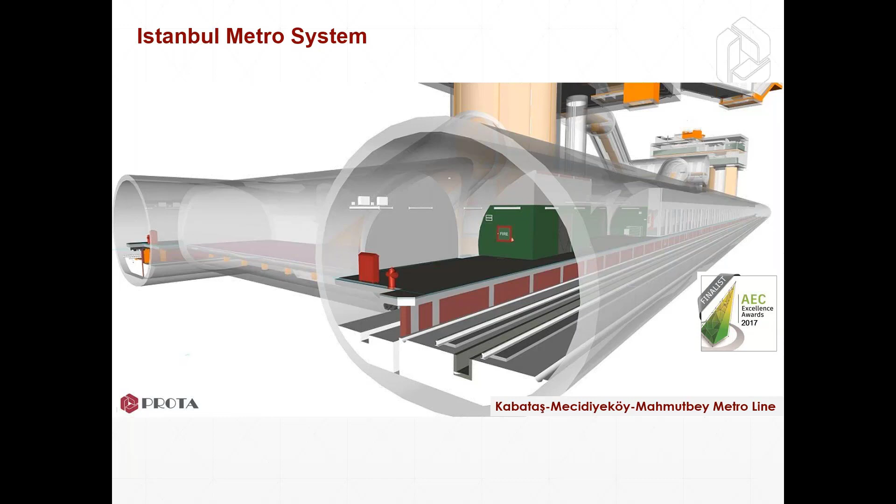So we've been involved with delivering some very large industrial, commercial, civil, infrastructural projects using our systems. We've been involved with delivering things like the Istanbul Metro. Last year we were involved with the largest terminal building in the world. We were involved with full design services for this.

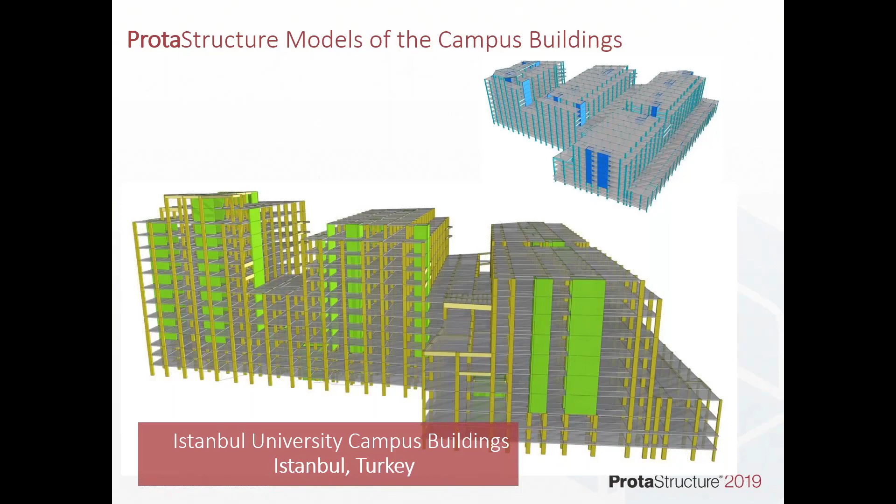We've also delivered other interesting projects, a number of airports around the world, Cairo Airport, St. Petersburg, Pristina. In fact, we've designed over 20 airports globally. We've also been involved with some very large, quite complex and challenging educational facilities and medical facilities. Recently, we were involved with the largest hospital in Istanbul, and we've also delivered on a range of other interesting projects.

An interesting one we've just been involved with recently was the new Turkcell building. This was for a data center for mobile communications, which houses very sensitive equipment. And part of the design process was looking at how we could ensure that the building was functional after an earthquake, and that sensitive equipment was protected.

So there's a lot of interesting parallels with what we're doing in practice as a consulting firm, and bringing that experience into shaping and delivering the software. Obviously, we also work very closely with our clients to ensure that the kind of development that we introduce is fit for purpose. So today I was going to talk about ProtaStructure 2019, and in particular Service Pack 7.

ProtaStructure is actually a collection of tools that forms one complete integrated system. Now, everything comes together, so it is one package. And the concept behind ProtaStructure is it's made up of a central modeling platform, which is ProtaStructure, and it has ProtaDetails and ProtaSteel for concrete and steel detailing. And being a physical modeling system, we can integrate this with other platforms, including Revit and the like.

So just a bit more detail on that. ProtaStructure is a structural BIM design solution for concrete and steel buildings. Now, what do we mean by that? Well, we are working with physical objects to develop models very quickly. And as we develop the model, we will automate a lot of the things that you would normally do conventionally. Things like loading is automated.

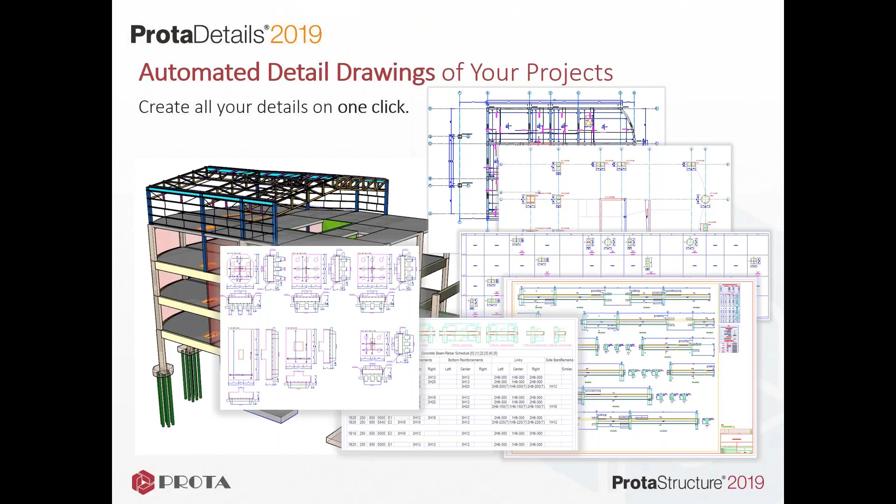It is a complete CAD system, so you can make changes in here, and you can just adapt things to suit the end product. Okay, it works natively in DWG, so it's very much a little bit like AutoCAD in the environment, and you can use it as your own preferred drafting platform if you wish, but we've got specific tools in here that help manage the delivery. And also we have ProtaSteel, and ProtaSteel allows you to automate all your connection design, and then from there you can produce all your detailed drawings right down to shop detailing.

Now BIM's becoming increasingly important with how our clients deliver projects and communicate with other project parties. And this is why we've spent significant time investing in integrating and having an open platform where we can share and communicate with other platforms which are commonly used in the engineering and architectural space. So we have bidirectional links with programs like Revit. We have links out to IFCs. We have direct links into other platforms like ArchiCAD and Tekla.

There's a range of tools here that just allow you to easily take information out and share and communicate with other people within your project team. Now, the links are intelligent. You can work in a bidirectional manner. You can make changes, say inside Revit, and those changes can be communicated back into ProtaStructure. So the whole idea is that working with a physical model, these processes become very easy and very seamless.

So enough of me talking and introducing us. Let me get into the software and show you how this works.

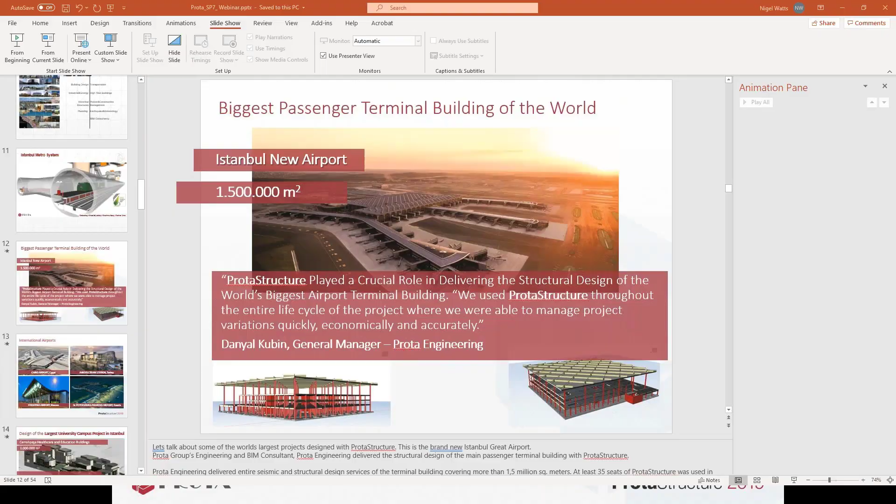So I'm just launching ProtaStructure, the 2019 version, and when we start the system, just give it a second, it's going to load, and you'll see it's just flashing up. I'm using SP7. We're about to release this into the market. It's a small update that fixes a number of known issues that we've had, but it also significantly enhances our OpenSees integration.

Okay. Now, if you're new to the platform, we have quick start guides. We've got online help systems, YouTube type videos that you can watch. We also regularly update the software, and they're all fully documented, so you can see what's new progressively as we've rolled out new service packs. And what we tend to do nowadays with new development is we're continually rolling out new features and functionality, as well as updates to the system, in between major releases.

Now I'm just going to come in and create a new project. You can give this project a name. Let's just call it Global Prota. And if you hit OK, you're then faced with a series of templates here. Now these templates will help drive your design and detailing. And you can choose any template you like in here, depending on your location.

Now we've studied different markets, and these templates have been set up to suit local practice in each of these markets. So if you're doing a project in the UK, you could load the Eurocode template there and follow local practice in the UK. Maybe you're doing a project in Singapore, or perhaps you've got a project in Ireland, or maybe even Hong Kong. So you can just choose these templates, and we've locally customized those to suit the way engineers would typically work within those countries.

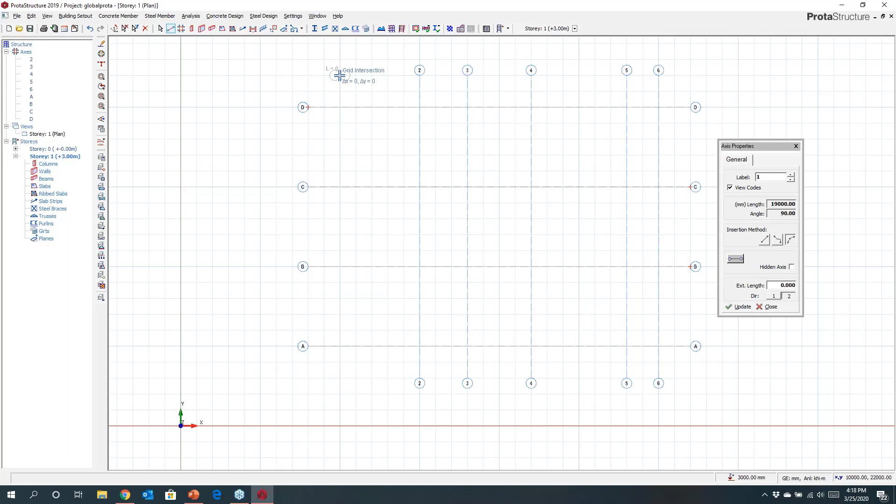So if I decided that I don't want this particular axis to be straight, maybe I'd like to define it as a curve. So in here, you can come in and set these up and create. Now you're not constrained, so if you have a very irregular geometry, maybe here I've got an axis which is not exactly straight, you can create these in here. So I can use this to help me create any unusual geometry, and you can see you can virtually create any type of grid line arrangement that you like.

Okay. Now we use the grid line arrangements to help us set out. Now at this point in time, I might want to come in and place some columns. Now you can see that the object that you're working with is previewed, and you can then click to create that in the model. Okay, and you'll see that as we're going, we're automatically creating numbering and labeling for the elements in here. To create multiple elements, you can box around.

If you wish to change the orientation of things, you can type in different parameters here. Okay, maybe I want to orientate the columns along the curvature of that grid. You can see that I've just automatically aligned those there as I've gone.

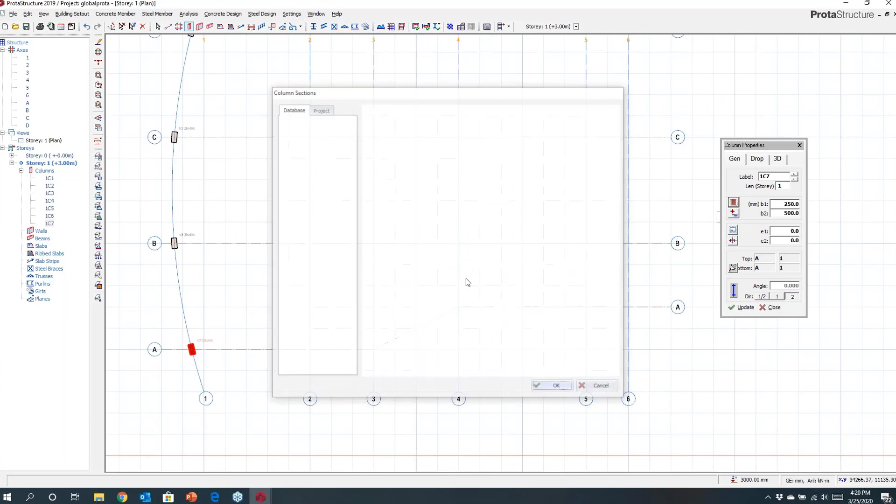Now in the library here, we've got different objects that you can work with. So I'm using maybe some concrete elements here, but I could very well be working with steel. Okay, and there's a range of different steel libraries that you can draw from. You can create your own sections, built up sections in here. There's also cold form and composite elements that you can work with here. So you can just draw from this library and choose the elements that you want to work with, and then go away and create those in the model.

So if I create a 500 diameter column here, we calculate the underlying engineering properties, and then you can go and grab that and use that in your model. So here I'm just placing some additional columns in my model. Okay. At the same time, I may also want to place my core wall. So again, I can just key the core wall properties in the dialog, and then I can go about modeling that.

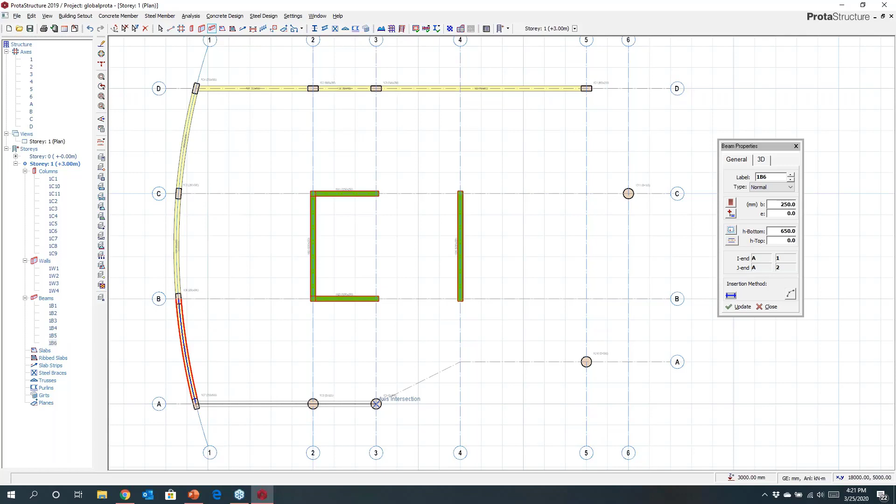Now I'm going to move to beams, and in here you can key in your beam properties. Okay, you can control things like fixities and alignments and so on here as well. But to create your beams, you can just box around to put them in. Okay, and you can see I've just quickly boxed around, or you can click between elements. Now, if you have unusual arrangements like here, I might have a beam that's cranking, it will just follow that grid line, or I can just snap to a column and then that is created automatically.

If I have a beam that's, say, curved, we can just instantly come and create that curve as we go. Now, if you have lots of members, you can just box around to put those in, okay? And the system will automatically create those members. It has split these beams. If maybe I want to place a beam through this wall, we understand that those beams and walls are already existing. You don't need to worry about overlapping. You can just draw them in, and we'll create those extra members either side of those existing elements.

Now I'm going to snap to some points here. I'm going to snap to, say, mid-span. You can see there's some handy snap points that we can use just to create those in. And you can come in and maybe you want to change the beam sizes and so on as you go. But if you've got a particular distance, and if you hit F2, you can just type that in, and you can just place. Whoops, sorry, let me do that again. Okay, so as I'm mousing over, maybe I want to place a beam at a different point. You can just select those points, and then you can place them in.

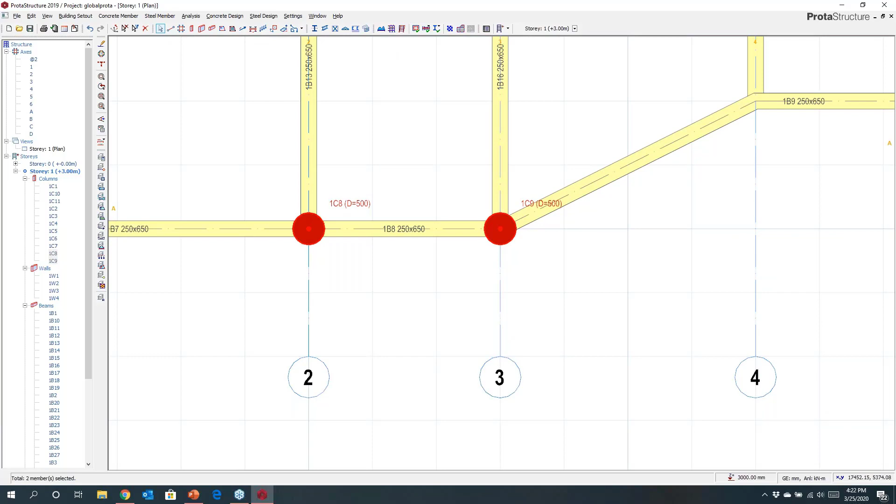Now in here, once you've got the geometry in, you can work with this. So you can see that I'm just using my cursor keys to move these around. If I hit Control, I can move them back and forward. So I can just reposition the geometry to suit the underlying architecture. And that could be for a beam, or it might be for some columns as well. So I can just move these into place and adjust them to suit the underlying architecture. So the idea here is you don't need to be perfect with your grid line set out. You can just adjust and tweak things to suit.

And what you might also see here is that this is starting to look a little bit like a key plan. Okay, now I'm going to come in and key in some dimensions here. I've got maybe a 200 thick slab. Okay, I can draw from a library of finishes, and you can build up finishes with things like screed and marble and so on to create finishes.

And you can also, if you're not sure about live loading, this will connect to the code, so you can just come and choose what might be appropriate for your building. So maybe I've got a bedroom and that's my finish, okay, and then I can just click and we can create those elements within the model, okay. I may want to type in my own values. You're free to do this, okay.

Maybe I've got a toilet area where the live loading is a little bit higher. Again, I can just come and define this in the model here, okay. If I want to just key in my own values, any of these can be just adapted to suit, okay. So you can just happily go around creating these within the model, okay. Let's just do a couple more, and maybe I'll make that, I don't know, maybe it's 0.7, okay.

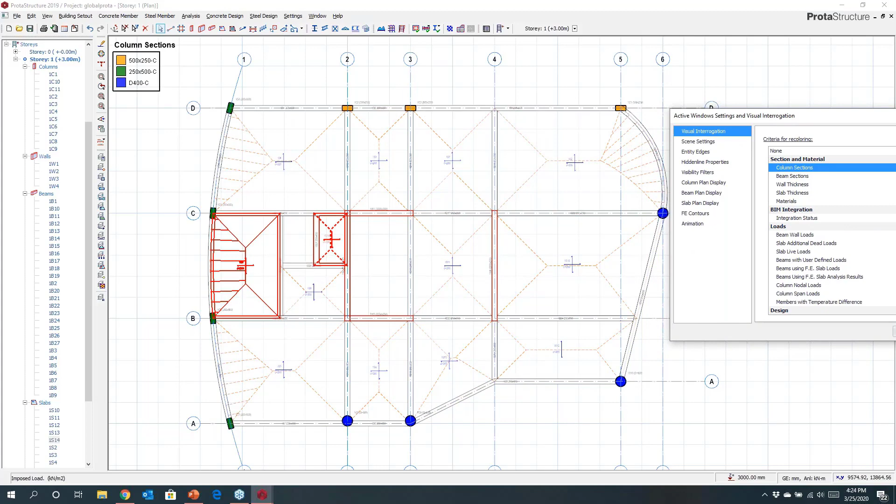Now, at this point, before you get too far, you may want to come in and review what you've done before you actually develop the model upwards. So in here we have tools for just interrogating the model, making sure that we are happy with what we've created. So here you can see the different column sections that have been used, or maybe different beam sizes that we've employed within the modeling.

I may also want to be looking at what kind of superimposed dead loads I've placed on the model, or maybe what live loads. So all of this is interactive, and you can see and check the model before you get too far. So that's a great tool just for being able to check before you start to develop things upwards.

Now, there's other things you can do in here. We have things like adaptive sketch lines. So if you've got unusual geometry, maybe over here I've got a slab which is a bit different. You can come in and use these sketch lines to create maybe the geometry of a slab, and then I can come in and place that within the model. So it could be a 150 slab. I can choose the type of slab it might be here, okay, and then maybe I want to drop it 100, for example, and then we can use it as a boundary to help us create that element within the model.

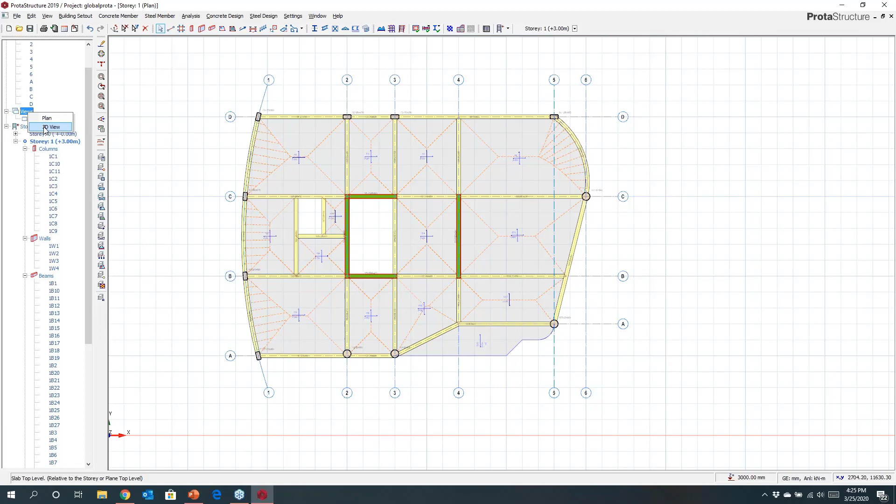Now, I've been working in a plan view, and you can see that this is starting to look like a key plan. Now, even at this point, I could actually extract that drawing out. I could also get the volumes for that floor if I want to. But what we're actually doing underneath this is that we are actually creating a 3D model. Okay, so you can see here that I've been working in 2D, but this has helped generate a 3D model.

Okay, and in here I can come and look at things both in 3D as well as in plan. So simultaneously you can work in plan and 3D. If you've got other screens, you can pull views off. Okay, so if you're working with a couple of screens just to make things easy, you can take advantage of that as well.

I'm now going to start to put in things like my brickwork loading. In here I can come and edit, say, beam wall loads. You can come and choose from libraries here of standard brickwork finishes, okay, or you can build them up yourself. And then you can just type in properties, and then I've just then come and quickly created loading on that beam.

Now, things like beam loads can be copied easily. Okay, we can just come and select elements around the periphery here. Okay, so you can see I'm just working my way around the edge of the building, and we can copy and paste those. So you can see that loading has just been automatically assigned to the perimeter of the building.

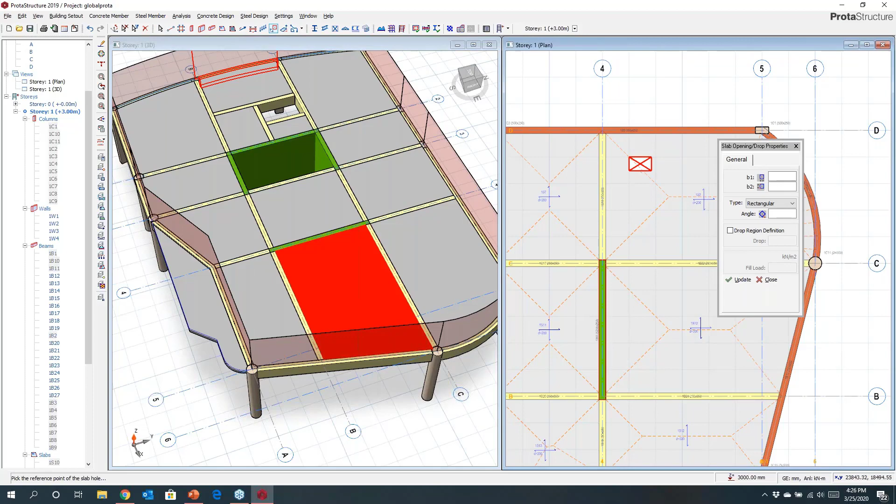Okay, now remember that we are working with a physical model. So if you want to come and place other things within the model, maybe you have some openings for things like services that you want to place, you can just come and easily create those. Now these are objects, so I can pick them up and move them around. So if I made a mistake with the positioning, I can just reposition these, and that's instantly updated.

Okay, if you have other things going on in the building, perhaps I want to introduce drops and the like, these can be easily defined in here. So maybe I've got a bathroom, and maybe I've got a set down to the slab that I want to look at. We can just create that drop, and you can see that part of the slab has now dropped.

You may have other things happening in the model. Perhaps you've got some additional loads that you want to define. It could be a brick wall load, for example. Maybe you want it to sit directly on top of a slab. Maybe it's a partition or something. You can just come and create that. And again, anything that you create in here, whether it's line loads, point loads, patch loads, all this will be visualized. You'll be able to see exactly what's going on within the model.

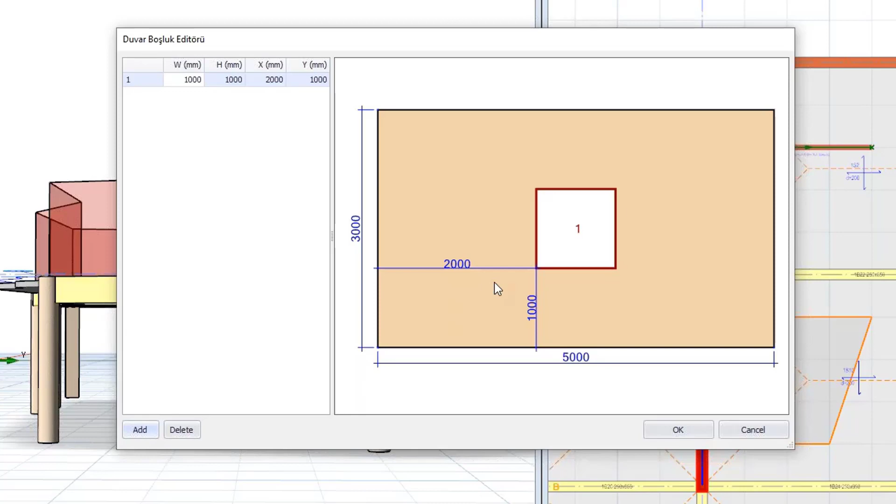I might also, at this point, just take the opportunity to introduce some openings into the wall. Maybe in my shear wall there, I've got an opening for a window, or it could be a door. You could have multiple openings. You can just come in easily in here and create that within the model. Now that just gives you an idea about how you might go about creating a key plan.

Okay, now there are some other smart things that we can do with this. So if you have other types of geometry, other types of elements within the model that you're wanting to consider, and what I'm talking about here is irregular elements, then these can also be worked within the model. So an example here might be that I've got an irregular column. It could be, say, a polyline column where I'm wanting to create unusual geometry. So in here, we also have tools to allow you to work with this. So if I have a column shape that's a little bit different, I can come in and create this element and use that back in the model.

Now what we can also do is use this to help us drive our detailing and set out. So we will pick up regular shapes automatically and we will provide detailing for those, but we also have the ability to create detailing for any type of geometry that you might have. Now I'm just going to ask it to try and automatically contain this, and you see it's found the perimeter there and it's placed some bars and links.

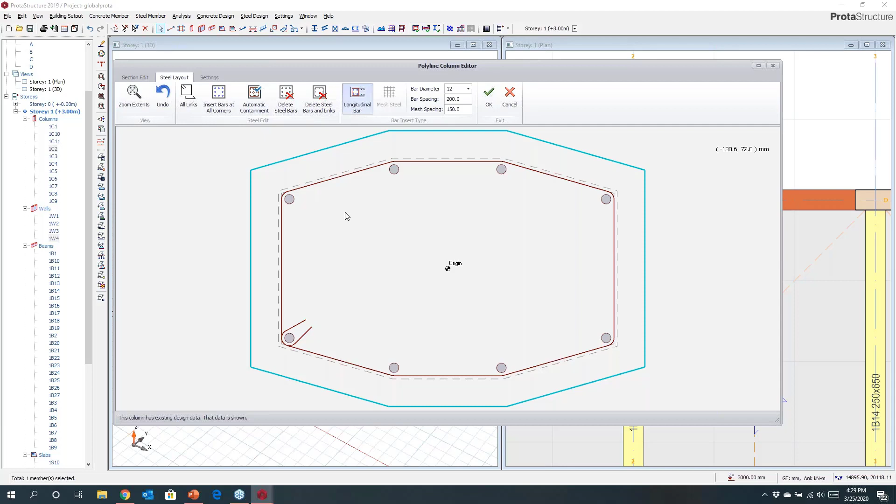I can also work with this. So if I want to add extra bars in here, maybe I want to add an extra couple of links to tie things together, or maybe I want to create some links around the edge there as well, I can. If I wanted to add extra bars in here, we can also work with this to create this as what we would call a template to then be used for the design and detailing.

So I'm going to put some extra side bars in there, maybe my spacing needs to satisfy the code, and I can create whatever type of rebar arrangement I like there. Okay, so you can use this tool to create virtually any type of shape, any type of column geometry that you like. And once you're happy with that, you can just hit OK, and that's then returned to the model.

Now, similarly, we can do similar things with the core wall here. So I'm just going to grab the core wall, and I'm going to get the software to merge this. So this is now merged, and if I go back to our polyline column editor, the merged wall is now available here. Now in here, there are tools that allow you to create any type of configuration you like. You can introduce end zones. You can work with the bar arrangements to provide exactly the type of detailing you want.

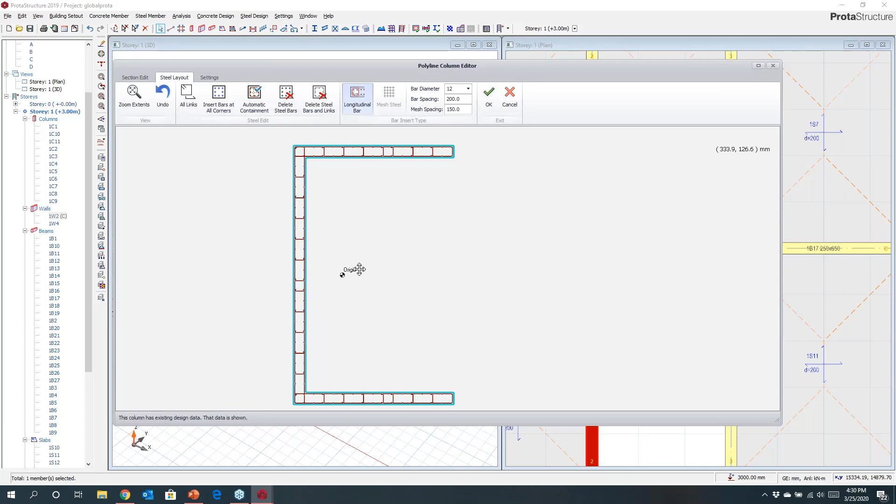I'm just going to ask it to automatically contain this, and if I just hit OK, you can see it's come up with a detailing arrangement. So this allows us to detail around things like corners. It also allows us to design this wall system as a single panel. We can then design and detail that as one object, and it's treated as one object within the design of the software. So maybe I'm happy with that. Then at this point in time, I may want to start to look at elevating this model.

So let's just come in and insert a few stories. Let's make this 5 stories high, and hit OK. And then you can see that that's put in placeholders for those 5 stories. Now I'm going to start to generate information up. So I can choose the first story, and I can copy this up.

Now you can choose what you want to replicate up the building. You can choose anything. So it could just be the columns that you want to repeat up. Maybe it's just part of the building. You can just select that and generate that up multiple floors. Maybe have different arrangements in different parts of the structure that can be created here. So if I hit OK, you can see that that's just generated up that part of the floor.

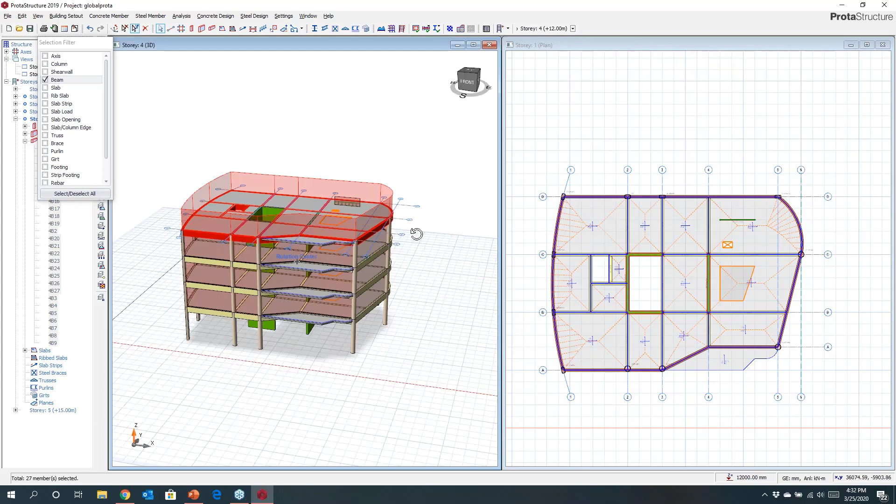Okay, and you can see there that we've come in and started to define what might be a complete building. Now you can work with this. You can make changes as you go. So if I want to remove things out, I can. If I'd like to come in here and maybe filter things out, I could also do that as well. So perhaps I'd just like to filter a few beams. And maybe I just want to grab all the members in the roof here. Now I'm going to remove those, and instantly I'm then left with, say, a flat slab system.

Okay, now you can make changes in here as well. I might decide that instead of having my wall there, I'm going to remove that, and maybe I'd like to come in and change this, and let's put in a column. Now, as it's a flat slab, I might want to introduce a drop head panel. Let's put in a panel for the slab here. Let's make it 1500 square, and I can make a thickening just locally for the column to provide that.

So I can then come in and place these columns within the model, and you can see that I've now updated our building so that I've got my flat slab together with my drop head panels for the roof, but the rest of the structure may be a conventional building. So you can mix and match different structural systems in here. You can just adapt the model to suit what it is that you're wanting to achieve.

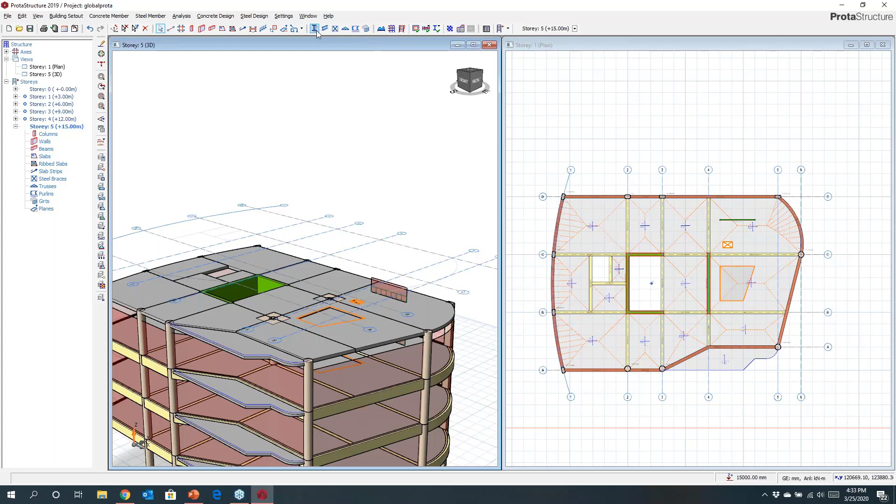Now I'm going to move to the roof, and at this point I'm going to come in and create some steelwork. You can see just to the center of the screen there, I've got different steel icons that I can work with. Let's just grab a column. I'm going to choose maybe a UC section. You've got different libraries here from around the world. I think everything that's readily available across the world is in the library. You can create your own custom sections as well to feed this.

I'm going to use a British section, for example. Maybe we choose a certain column, and then I can work with that in the model. So you can see here that I'm just creating these elements in 3D, and I've just placed some columns there within my model. I wish to create some trusses, so to do that you don't need to key the coordinates in, you can just come and select between elements here, and it will move you into the truss generator.

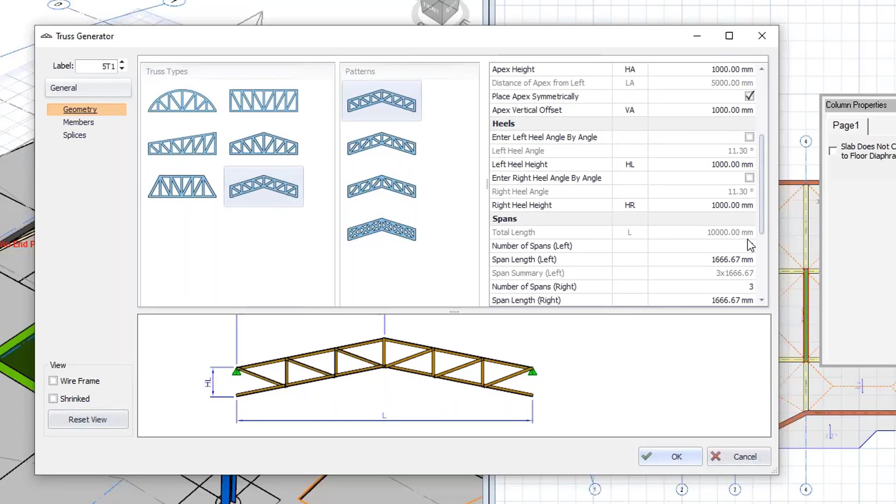Now this is very flexible. You can have different types of trusses. In fact, it's really flexible. There's a wide range of different truss systems that we support now. And you can choose the way that you might like a truss to be created. Now you can play with this. Maybe I want to have 4 bays or spans instead of 3. You can just adapt this to suit.

Member geometries are set up here, and you can come and play with these. So maybe for your internals you want to have an angle, or maybe you want a tubular section, or maybe you'd like to use a channel. It's up to you. You can just come and manipulate this. You can play and reorientate things to suit. And then you can just adapt this to suit. So here I can just come in and make these changes to the model. Okay, and then they're done.

Now you can position things like splices if you then want to move into ProtaSteel later and design these. So if I just say okay, that's created. The truss then becomes available to use elsewhere. So we've got smart copying features where I can just grab that and place this across the top of the building there.

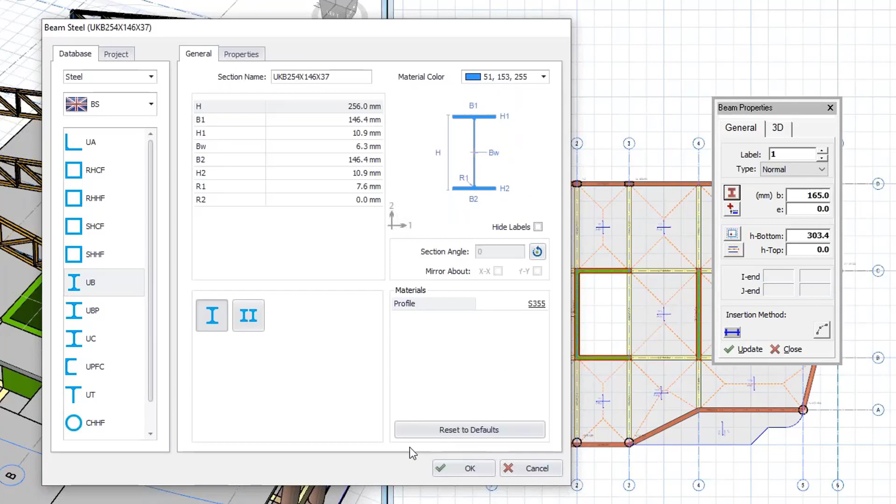Okay. Now, I may at this point also want to work with some steel beams. Let's just come in and create some steel members. I'm just going to choose a section. I can control fixities here. So if I want to pin both ends of the member, or maybe pin one end or pin the other end, you can see in the properties dialog you can control this, and then you can just come and place it. Now it understands that the columns exist, so those beams will be automatically split.

I'm just running across the top here, and you can see I'm just placing those members as I like. Now if I come to the roof, then I can just come and place members in the roof. You can see I'm just quickly doing that. There's intelligent snap points, so if you have unusual geometries, you can just snap to appropriate points within the model to make those connections.

The final couple of things I'm going to do in this model: I know that working with purlins can also be a bit tedious, so in here you can also drive the arrangement of purlins. So there's purlin generators here. We've used the truss nodal points as a set out. You can change these, so you can key in your own arrangements here. I'm going to come in and maybe choose a slightly bigger channel to start with. Okay, that can be set.

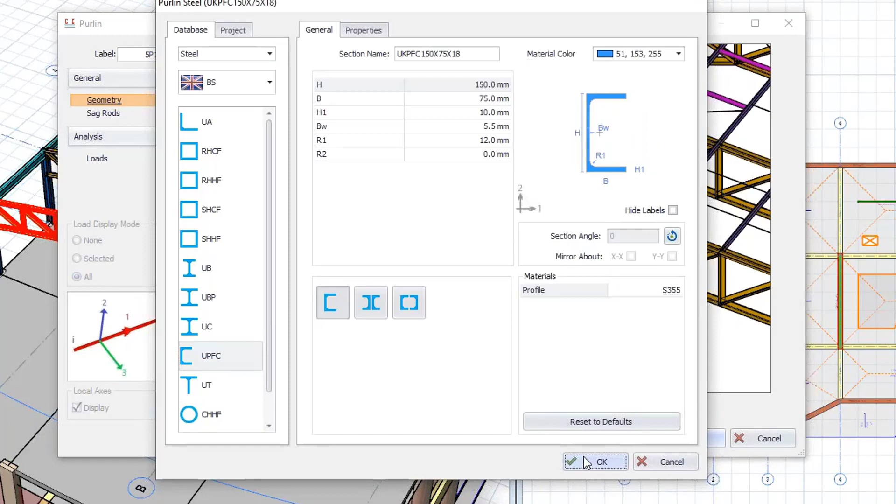You'll also maybe notice that we've also provided you with the sag rods here. So this is an update that we've introduced in the software recently. If you consider sag rods, this will help with the economy of the purlin design. But if you don't want to have them in there, you can also remove these.

Now the purlins can also be used to restrain the truss, and this will help with the effective length calculations for the truss, and buckling length considerations. You can also take advantage of that if you wish. Now you can also apply additional loading here to the purlins to set this up. But if you're just happy with that, you can hit OK, and then those purlins get created.

Now let's brace the building, because obviously I don't want this to fall over. So we can just choose a couple of elements. I've chosen those 2 columns, and then the software will propose to me a bracing arrangement. Now you can have different types of braces, V braces, K braces. Maybe you've just got a typical diagonal. It's entirely up to you. You can come and choose different sections in here. Maybe you want to use a tubular section, for example. You could choose something appropriate, and then this will adapt.

Now you can see here that those are crossing each other at the moment. I may want to just join them. It's entirely up to you. You can play with the orientation of everything in here. So if I wanted to move a brace by say 500, you can see that I've moved that. Now the analytical wire has stayed where it is at present, but if I want to realign that, I can. So it's up to you.

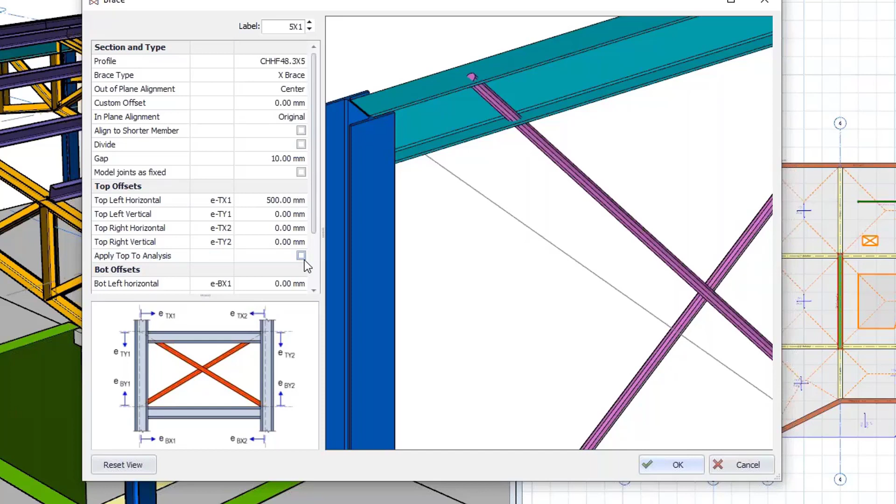You can adapt things. We're not necessarily changing the underlying analysis considerations. It's entirely up to you, but you can just work with this to achieve what you want. And you can preview what you're going to create before you create it. So let's hit OK. That gets done. Let's come across the top of the building here. I'm going to just create a bracing in that plane as well. Let's hit OK, and we can just work our way across to create the bracing of that particular part of the building.

Final thing I'm going to work with here is, let's just put in some girts. Now I'm just going to choose the peripheral columns there. You can play with the spacing, so let's just say it's 650. Again, I've got my sag rods in there. I might just take those out just for efficiency. And if I hit OK, then they get created also.

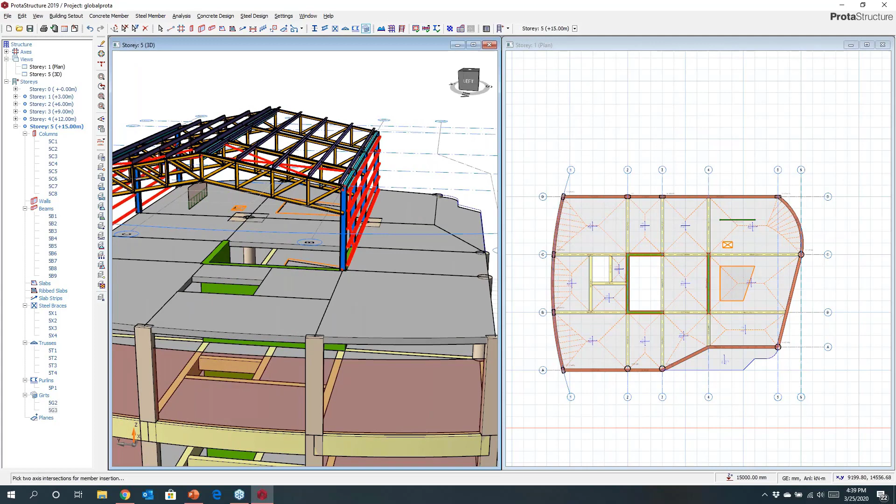Let's just work with this again, one more. Okay. So very quickly there, I've just come and set up a simple frame. I could put the girts across the front if I want. I could introduce wind posts. It's entirely up to me what I want to create here, but I'm just trying to give you an idea.

Now, the important thing with what we're creating here is that this is a physical model. So we're setting out everything physically. And this is very important because it then allows us to drive both the design and the detailing. Okay, so what we're creating here is what you would get on site.

So you can see that the purlins there are sitting on top of the truss. The girts are on the face of the column. The bracing's in the plane of the column. Okay, the concrete structure is set out exactly how you might see it constructed at the end of the day.

So this is how we work with physical objects. It's a structural BIM design model. So we're actually creating real intelligent physical objects that we then can drive through the analysis and design process. So we've completed a basic model. I now want to move in to look at the analysis and design processes. So I'm going to come in and just show you how this works.

When you come into the system, you can come and choose your preferred codes of practice. Okay, so within the software, if you're wanting to use American codes, British standards, Hong Kong standards, Eurocodes, we also have Turkish standards, being headquartered in Turkey. And there are other international codes that we're progressively introducing in here.

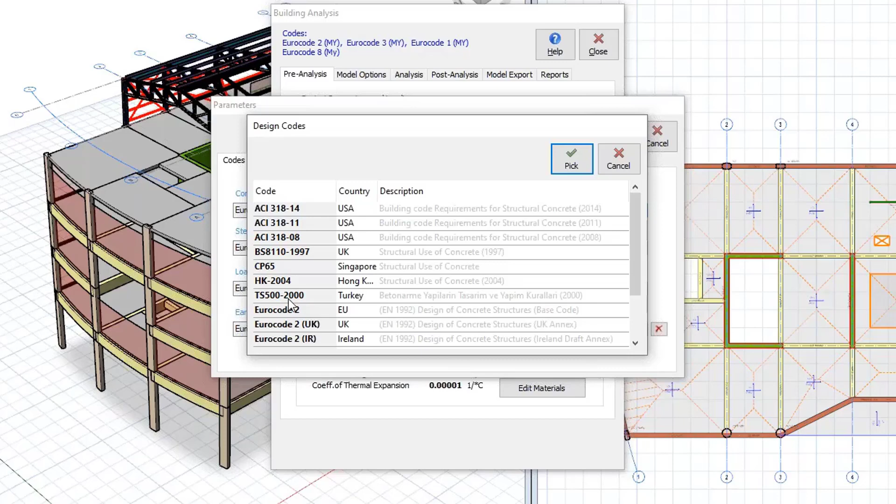If you are working locally, there's also variations for local standards. So if you are tuning in from, say, Indonesia or the Philippines, there'll be localized codes there for seismic, as well as standard IBC, UBC, and Eurocode standards are available. Okay? But as I mentioned, we are continually adding new standards, and we've got some new standards on the way that are coming in very shortly that we will announce with the next release of the software.

So in here, I'm using the Eurocode. I'm using it to the Malaysian National Annex. And if I just close that down, we then will cover parameters to that local National Annex. So here in Malaysia, you can come and choose your preferred city. If you're working with the generic Eurocode, then you'd have the generic options here. But for each country, we've come in and localized this to suit their local requirements.

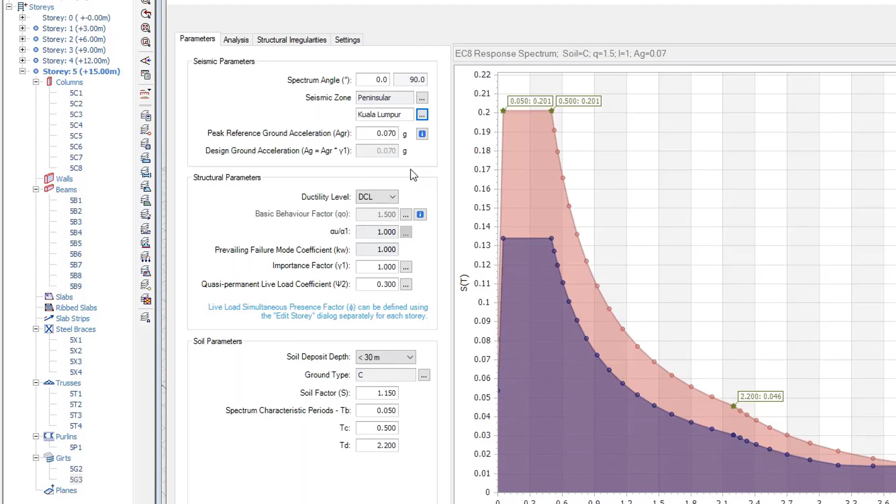So in Malaysia, for example, there's various seismic maps that you can choose data from. But if you don't have these maps available, or you're in different countries and you want to use Eurocode, then you can choose the generic EC8 option, and then you'll have full access to the EC8 code, and then you can just key the local parameters in accordingly. So we will then adapt this to suit.

You can choose from different ductility levels. The software is very capable and very powerful in performing seismic design. So if you are in a highly seismic region, we have significant capabilities in this area to really help you deliver design and detailing to suit what can be quite tedious and very time-consuming design requirements. So you can work with high ductility or medium ductility frames, or in this case, I might just work with a low ductile structure.

Okay, things like importance factors and so on can be prescribed depending on the type of structure it is. We will work with ground conditions, and you see that if I change the ground conditions here, the spectral curve will adapt to suit the code-based requirements. Now, if you do have a spectral curve of your own, you can import this. You can bring it in from Excel and load that in here. So this can be fully customized to suit where you may be in the world.

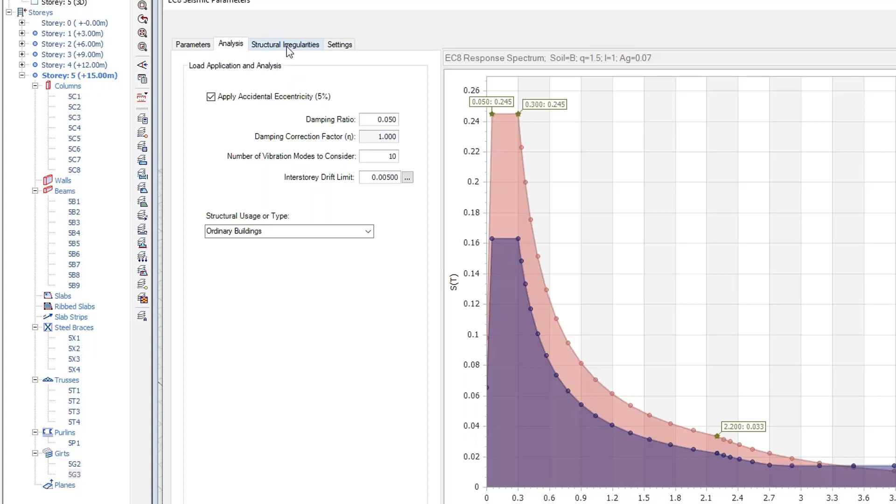Seismic loading is applied eccentrically. Okay, you can choose a number of modes that you wish to consider in the analysis. If you're running a response spectrum analysis, damping and so on can be adjusted to suit. We have some quite sophisticated checks that we can perform for irregularities. These are very onerous and are a requirement if you are in a high seismic zone. So if you're designing a building in the Philippines or Indonesia or maybe Turkey, these would be key requirements that you need to meet.

So these are automated within the software, and we will check things and we will apply penalties accordingly if they are required. So things like torsional regularity checks, mass and stiffness checks in plan, all these types of requirements will be looked at as part of that process.

There are also some quite advanced design capabilities. So for seismic, we also check for joint shear, strong column weak beam action, and there are a number of other key things that we do to make your life easy. So we will automatically scale the RSA results against the base shear to give you correct values, things like this that maybe normally you'd have to do manually.

So OK, that's set up. I'm now going to come in and create my loading. Now you can come and define your load combinations here, basic dead load, pattern load. Stage construction cases can be set here, and lateral cases can be set up here as well. So seismic cases, notional loading, or wind loading cases, all these can be defined here, and you can just set these up to suit.

So if I did choose wind loading and notional horizontal loads, then it will develop all the load combinations here for me automatically. So these are all set up in accordance with the code. They are adaptable, so you can just come back and make changes if you decided that you didn't want to consider certain things in here. Then you can just adapt these to suit. It's entirely up to you.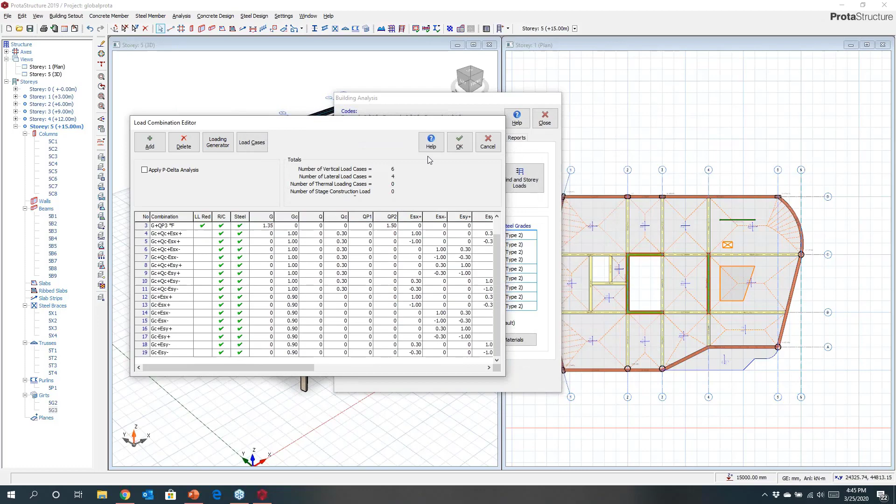So now I can come and adapt the parameters to suit the way I'm doing my design. So if I have certain bar sizes that I wish to omit and not consider in the design and detailing, I can do that here. Or if I have different grades of steel and concrete that I want to use, all these can be specified at this point. So they can easily be set up.

Now I'm going to run the model. We can have different cracked section properties for lateral cases. So if you are following the American code, there will be certain stiffness adjustments. You can make these adjustments to the Eurocode as well if you wish, but sometimes for lateral cases, particularly for seismic, you may be considering cracked cases, but then you don't want to use cracked cases for gravity cases, to say the Eurocode.

You can look at both of these concurrently. So I can set up two different stiffness matrices. One is cracked section properties for lateral cases, perhaps, and another one is uncracked for gravity cases. And we will run these concurrently, and we can envelope these for design.

I'm going to use rigid zones, and the reason why I want to employ rigid zones is I want to maybe drive a little bit of economy. So instead of taking moments at center line, we build rigid arms out to properly represent the size of the beam column joints, and then we can use those for more efficient design. If you had your foundations in the model, after the first run, I could produce a preliminary design. We can merge those back into the model, and we can look at soil structure interaction here.

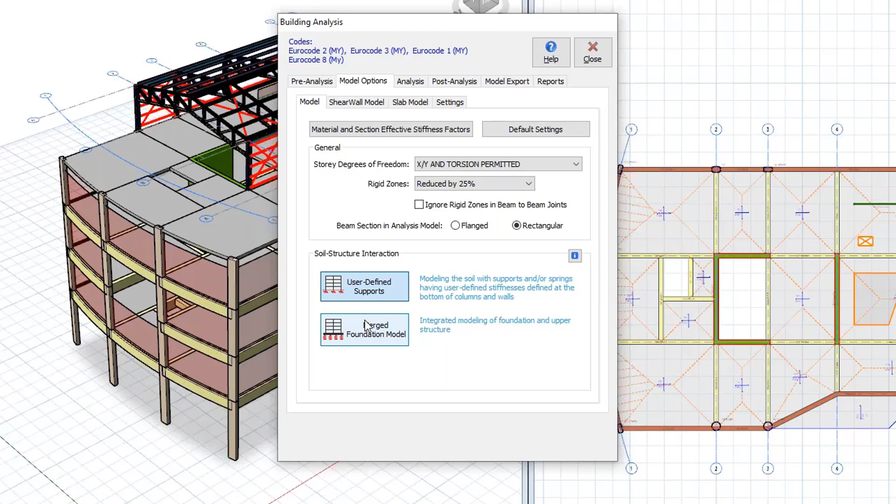Now I'm going to mesh my walls, and you can play with the meshing parameters here. I'm also going to come in and mesh a slab. So I set up at the fourth floor there, I have a meshed slab. So I'm going to define that as being meshed. And I can play with the meshing parameters here, as well as in-plane stiffnesses. So these can be set according to your preferences.

Now the analysis is a button, and once we've got this in place, we can then just come in and run the analysis and design. And you may see pre-analysis that there are building model checks here that you can perform. These will just interrogate the model and make sure that you haven't made any silly mistakes with the way that you've gone about creating the model.

If you're an existing user, I would really encourage you to do this. It will highlight to you if maybe you've made some errors with connectivity, that type of thing. They'll be picked up as part of that process. So that's a great tool just to use to make sure that you haven't made any silly errors before you get into running the analysis.

Now with this Service Pack 7 and with Service Pack 6, we've introduced a new 64-bit solver. We've enhanced the speed significantly over previous solvers, and this has allowed us to cater for significantly larger projects and models. We see some very, very large buildings, 40, 50 story high buildings coming all the time, and we've enhanced the system to be able to cater for those types of projects.

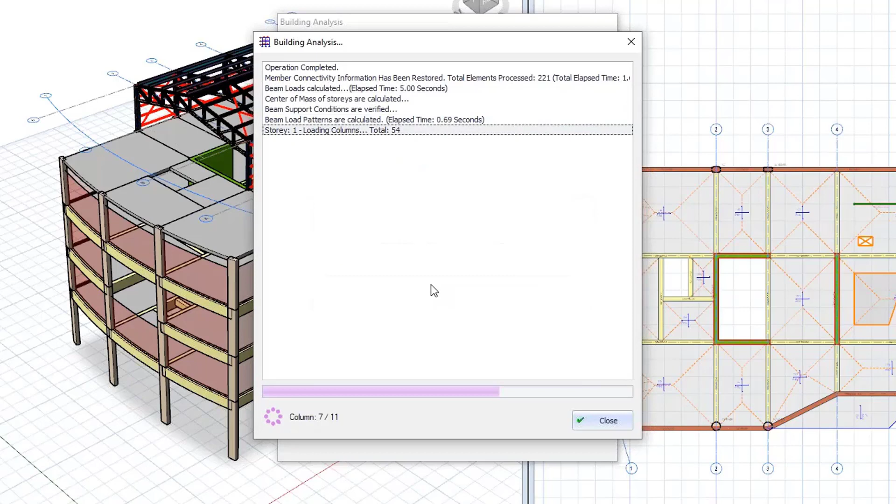Now the program also will check things as it goes, so it knows that I've actually got a couple of columns that are sitting on top of the transfer slab. You might recall I've got the steel sort of shed sitting on top of the roof there. It's picked that up and it's asking me if that's what I want, and so it will check things as we go and highlight things to you as it works its way through.

So now it's moving in and running the analysis, and you can see it's just going through and preparing the data. We've compressed significantly the amount of time that this takes with the recent builds, and the analysis is done, and it's now doing a lot of the post-analysis checks. So these are the seismic checks that I was talking about with looking at irregularities.

We will also check to make sure that things like loads are being chased down properly. For users, you might have just seen that maybe I would like to use an FE load distribution because of the way I've modeled my slabs with extra loads. Now you can also see a summary of the irregularity checks that we've performed to the seismic code. If something's not right there, then that will also be highlighted to you. Okay. So now we're done, that's closed.

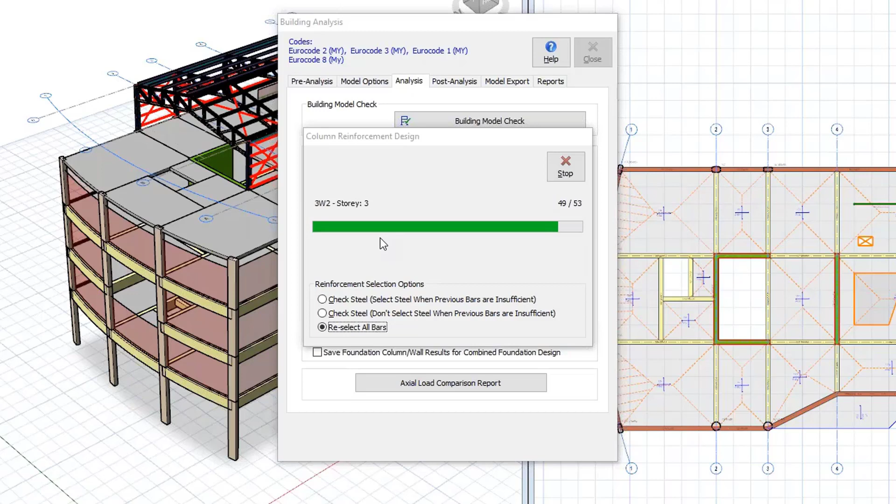It will then move in and automate the design here. So I'm now moving in and designing all my columns, beams, walls. I can also design steelwork in a batch process. And we are optimizing things as we go here, so it's going in and trying to select the optimum arrangement of bars as we progress through the design. So we've designed all the columns and walls, and now it's moving in to the beams.

Now what you may also note, and this is probably not a feature that even our existing users use as well as they could, is that there's check design features there. So whatever you design in the system, we keep. Once you've done your initial design, you may find within a project that there are changes that are occurring. Maybe some additional load gets added to the building. Maybe I've got to change some of the structural configurations.

The idea with this platform is that you just make those changes, and those updates can automatically be checked against the existing design that you've performed. So anything that doesn't pass because of those checks will then be highlighted to you. So it's a really nice tool for being able to manage the inevitable changes that occur on a project.

So we're done. I'm going to come in now and look at the analysis post-processing. This is just, I guess in a way, a preview of what's coming with the 2020 release, a new analysis post-processor. So I'm going to load this and show you the model results. So think of this a little bit like you might see in SAP or STAAD or any other general analysis program. You can come in and start to interrogate results.

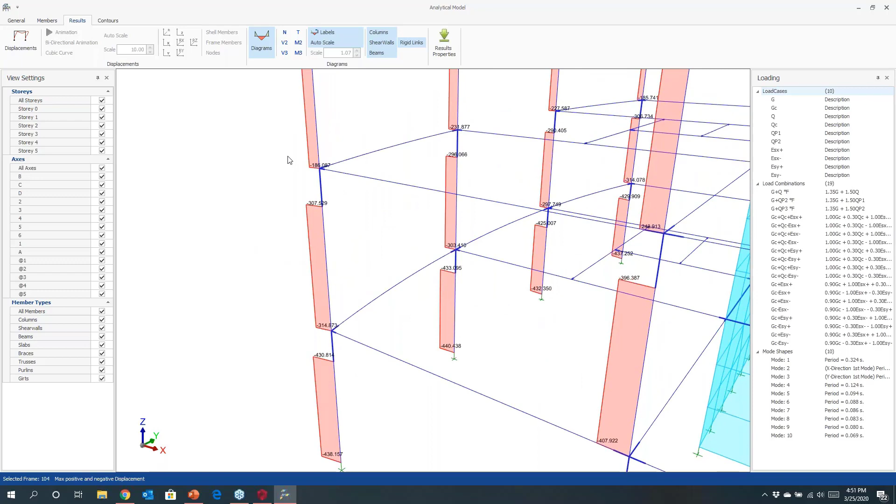So from that physical model, we've automatically created the underlying analytical model, and we've performed the analysis. So in here, you can come and look at different results. You might be interested in looking at, say, axial loads. If you come in here, you can see how the axial loads are increasing or decreasing as we go up the column, increasing as you go down. You can filter, so in here you can just adapt this to suit what it is that you want to see. Maybe I'm interested to look at shear diagrams, or perhaps I'm interested to look at bending.

Now earlier I was telling you that I've used rigid zones, and you can see that we've built rigid arms out automatically in the beam column joints. So that allows us to take moments at the face and not center line. So this will help drive additional economy in your design.

Okay, we'll take advantage of that, and often you can see a small saving in the reinforcement that you might otherwise need to provide. Okay. Now, maybe I'd like to go back and look at the whole model, and maybe I just want to filter out. Perhaps I'm interested to see how it's performing under seismic, and I would like to see the behavior of the building under lateral loads.

So you can see here that instantly we're rendering this, and instantly you can see how that's behaving. Okay, I might be interested in looking at the modal behavior. Okay, my first mode is not ideal, it's a torsional mode there. I've got quite an eccentric structure, but you can see higher mode shapes here. The fundamental period in the X and Y directions, and we can look at higher mode shapes here. So you can look at the various dynamics going on within the building.

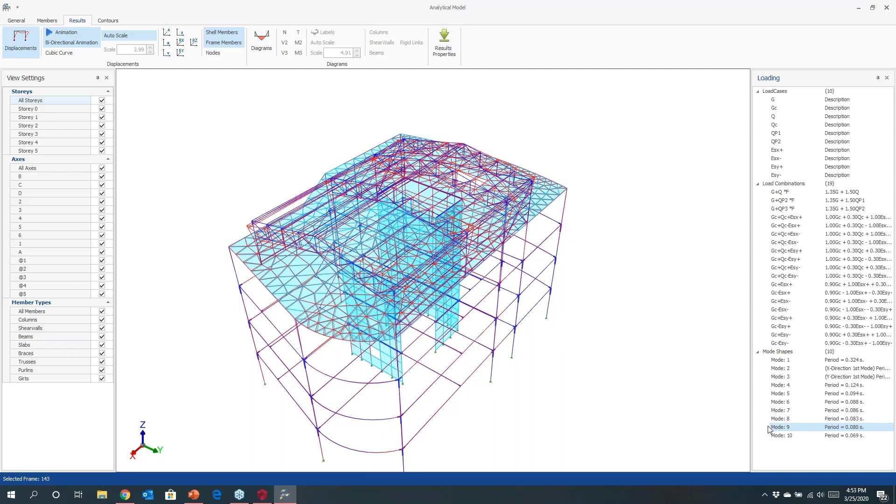Okay, so you can see that behaviour here is all animated instantly. Existing users would have seen a significant performance gain there over our previous post-processor. So this just allows you to get in and access information extremely rapidly. So if I'm happy with that, we can now move in to look at the design. You can see here that I've designed all of our columns. If you just click on a particular column, you can look at this in more detail. You can see what's critical in terms of design.

The interactive design is here. What we do is we calculate the neutral axis there, and we work out the lever arms away from that axis to work out capacities. Now, detailed design reports are created, and you can review these here as well. Okay. I also can come and look at things like interaction diagrams. They're available here as well, so you can easily see the results.

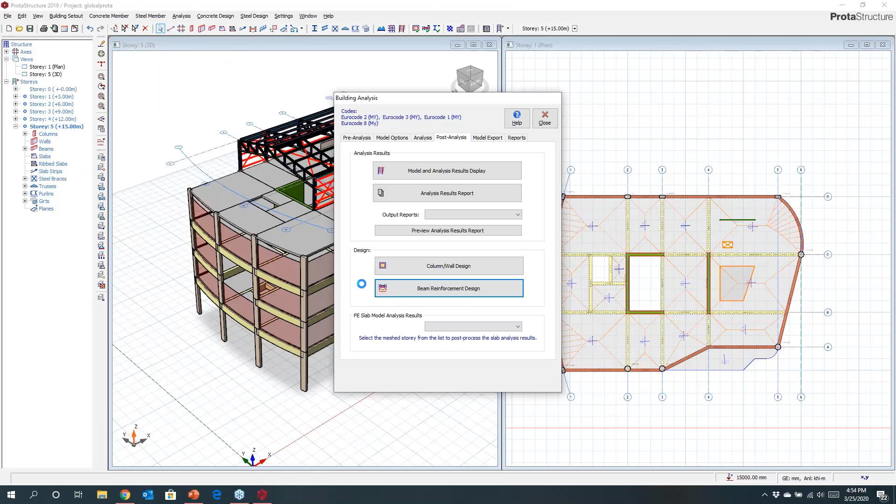Similarly, if we come to beam, we can come and look at the beam design and the model. I'll just open these up and click on a member, and we can interrogate this in more detail. Okay, so we've optimized the selection of the bars here. I can look at the diagrams in here, and you can see that there's diagrams here which summarize the envelopes. You can look at individual cases here. So the envelope there is a build-up of all the different combinations to create that one envelope. Okay, so you can see that envelope.

If you want to look at other things, maybe you're interested in displacement of the member under gravity. You could come in and choose that, and you can look at different types of relative displacement, normalized displacement, or absolute displacement. So you can come and choose different views here. These diagrams are dynamic. You can just zoom in and out to interrogate the results and see what happens. So maybe I'm interested to know if there's any torsion in the member. I could show that as well. If I want to turn these on and off, I can just adapt the views to suit what I want to view as part of interrogating the results. Okay.

Now, this design is live. When you come in here, you can adapt things. So if I reduce the number of bars there, you can see that this is no longer satisfying the code, both spacing requirements as well as the amount of steel. So you can work with this and you can adapt these results to suit. We're doing this on the fly, and it's checking things to ensure that they comply with the code requirements.

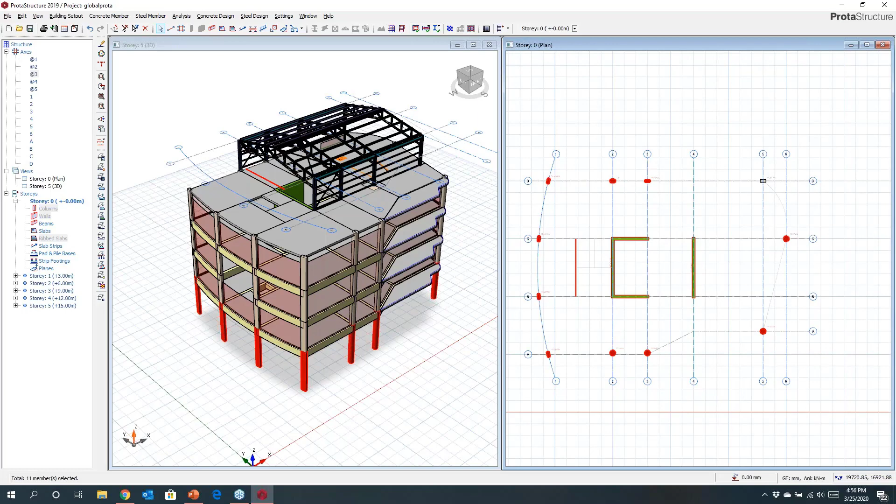So in here, under our foundation settings, we can set up allowable working loads and so on, but the system can then automatically design our foundations in a batch process. I'm going to group these, so it will find elements which are similar, and they'll be grouped in the model, and you can then see that I've now designed my pile caps in a batch process, and they've all been rationalized and placed within the model.

Similarly, if I have a pad base, again, we could come in and create this in here. You can key in basic parameters here. Okay, and the column data, all the loading has come down. We'll then calculate this. It will work out what's required. Maybe I want it to be a square footing.

Maybe I want it to be slightly eccentric, perhaps on the boundary. So you can just come and adapt this to suit. It's up to you. You can just create this until you're happy and it's designed. Okay, and then you can create that. Now there are a range of different foundation systems in here. We just don't stop at pad bases and pile caps.

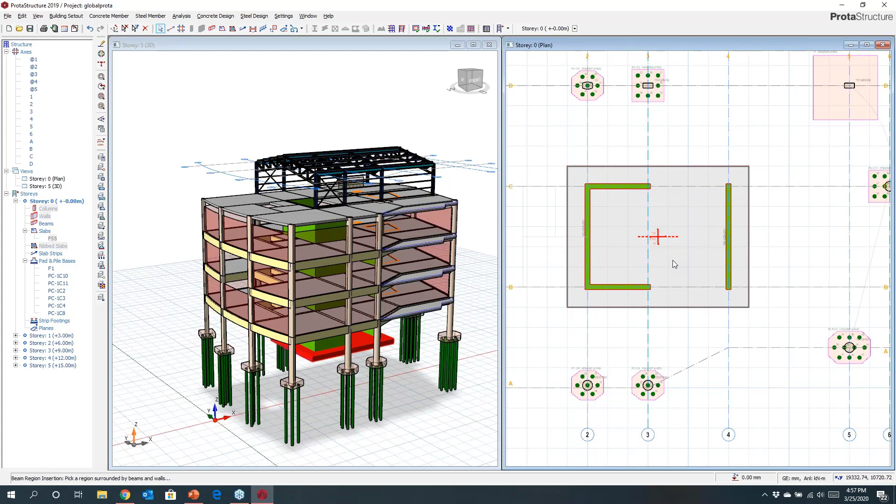You can come in here and define things like raft foundations if you wish. You can key parameters in here and create those. Maybe I'll just make that up. And you can also cut strips through these. You can do integral strips, finite element analysis for the design. We will also perform punching shear checks.

If you found that wasn't adequate, you even have the ability to be able to come in here and insert piles perhaps wherever you want them to be. So if I've got an arrangement of piles beneath the raft here that I'd like to generate, I can come in and choose those, and you can see that it's established an arrangement there.

Now all these are editable. You can place additional piles if you wish. If you don't want piles, you can remove them out. All this is adaptable to suit the project that you're working with. Now, there are other foundation systems. There are strip footings, combined foundations where you can merge pile caps, pad bases together. Okay, so there's a very broad range of different foundations that you can apply into the model here.

Now, at this point in time, I'm going to move in and just create some documentation. So I'm going to come and start to now publish out some drawings from this model. Okay, and to do that, I'm going to load ProtaDetails, and ProtaDetails is our system for automatically creating all of our general arrangement and concrete details. Okay, and it's just going to load this. You'll see it just pop up in a second as we load the project into ProtaDetails, and we can then use that to start to create that information.

Now, ProtaDetails, as I mentioned earlier, is also a complete CAD system, so you can happily draft in ProtaDetails and create additional details as you go. So it's a DWG file format. The commands are very similar to AutoCAD, and you can work in here. Maybe you prefer it. Perhaps it might be an alternative to using, say, AutoCAD or other CAD platforms.

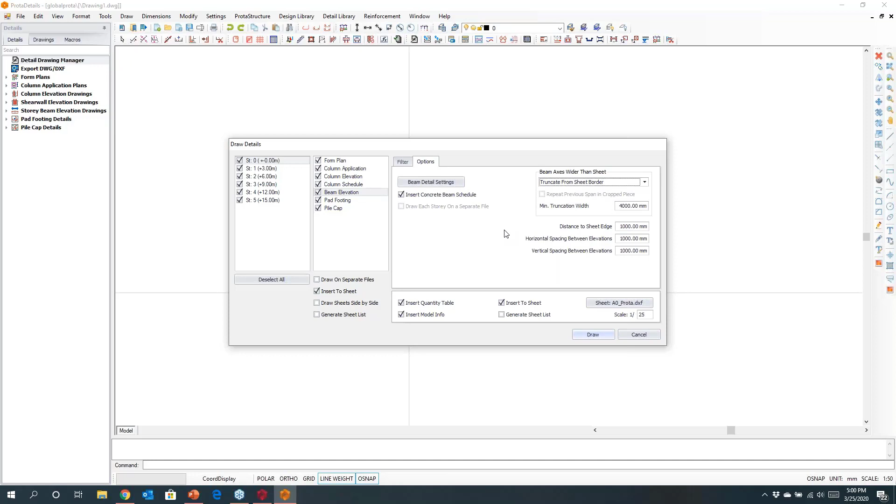Okay, you can make other adjustments here, so you can play with things like scales. Maybe I want to play with the way my beams are truncated within the drawing sheets. All this can be set up here. And once you're happy at this point, you can then just come and draw. So I'm just going to create the drawing, and it's going to go away now and lay things into my sheet.

Okay, and what you might see there is it's just started that process. It's laid out our sheets, and it's now going to go through and progressively start to detail things out. So it's trying to optimize the placement into the sheets here for you. Okay, it's looking at coming up with the best arrangements that it can. You can, of course, work with the details post creation and move things around and adjust it to suit.

Okay, you might just see there that I've got the key plan in there. You can see the foundation drawings, arrangement of pile caps and so on is provided. All the dimensioning and so on is all done. Okay. Now it's just adding a few more beams, and we are done. Now if I zoom out here, you'll see that within one shot we've actually created all the drawing details there. So you can see that all these sheets are created instantly.

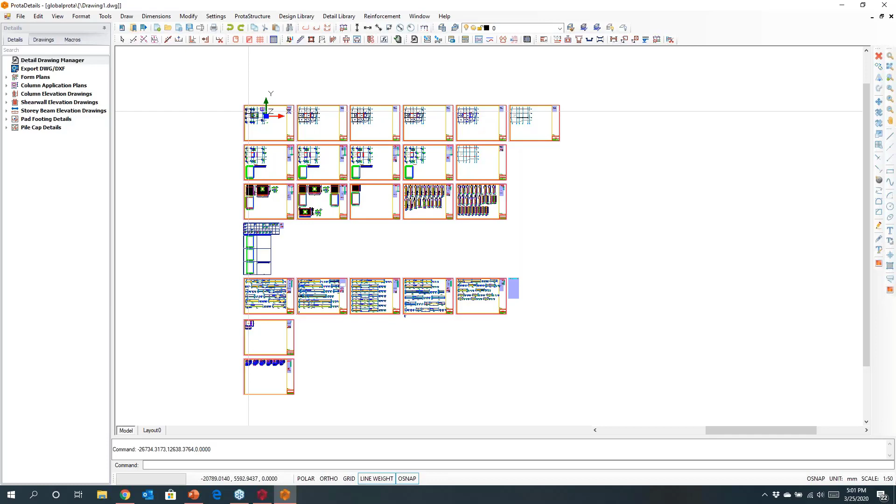You don't need to do this. You can just draw out the individual elements. So you might just want to draw out your beams first, then your columns, and so on. It's entirely up to you how you approach this. We wouldn't recommend for a large building that you dump it in one go, because this is a CAD file and this file can get huge. So you may just want to look at breaking them systematically into different sheet files.

So if I come in here, you can see our key plans. Foundation drawings, our key plans. The detailing is intelligent, so it knows that this is the edge of the building. You can see that things like the dotted line creations are all automatically done. All the slab referencing is provided. It's very flexible, so you can adapt this to suit. Here you can see our key plans, and we've laid them into title sheets, and all the proper referencing is done. As I mentioned, that's adaptable.

Now there are different drawings depending on what you want to show. So if you'd like to see set out against grid, you can provide this, and you can also see the shear walls and so on drawn within there. You can also provide your elevation. So here I'm showing an elevation of the shear wall, and you can see we've also detailed out that opening as well. We've also done the detailing around the core walls, so you can see how this is set out. Again, as I mentioned, this is adaptable.

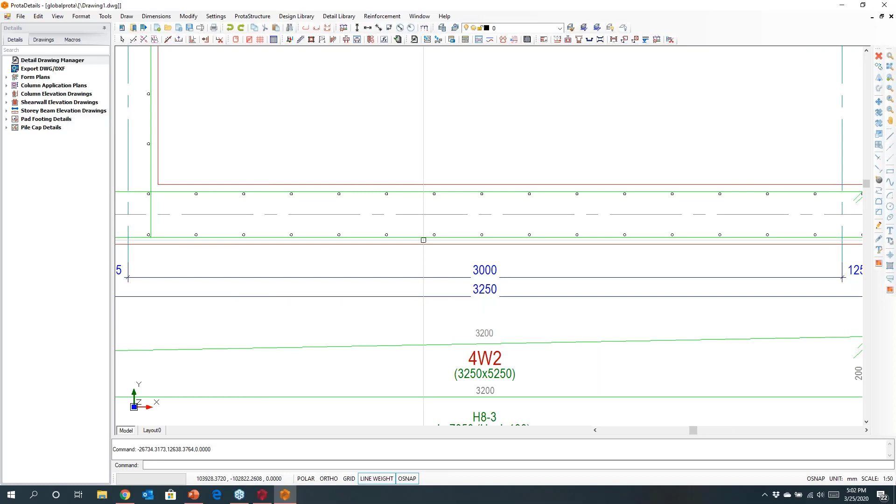With this particular wall, the steel percentages are very low, so it's omitted the ties. If you want to include the ties in the wall, you can. There's a lot of different settings within here which you can control with the way information is presented. For seismic regions, you would typically draw columns in elevation, because you'll have varying link spacings. You can play with the way in which things like laps are set up. If I want to lap at mid-height, for example, that could be set up.

And we would recommend that if you are in seismic regions, that you do detail elevations, because they will make it very clear as to how the column is constructed, and the end zones or the capacity detailing would be clearly shown. But you don't need to do that. You can also have things drawn into plans. And here you can see some sections. Now we're automatically grouping all the columns together, and they'll be automatically grouped by the system. Everything that's similar will be grouped, so you can quickly rationalize the way in which things are designed and detailed. So even my irregular column that I created before, we've designed and created the details for that as well.

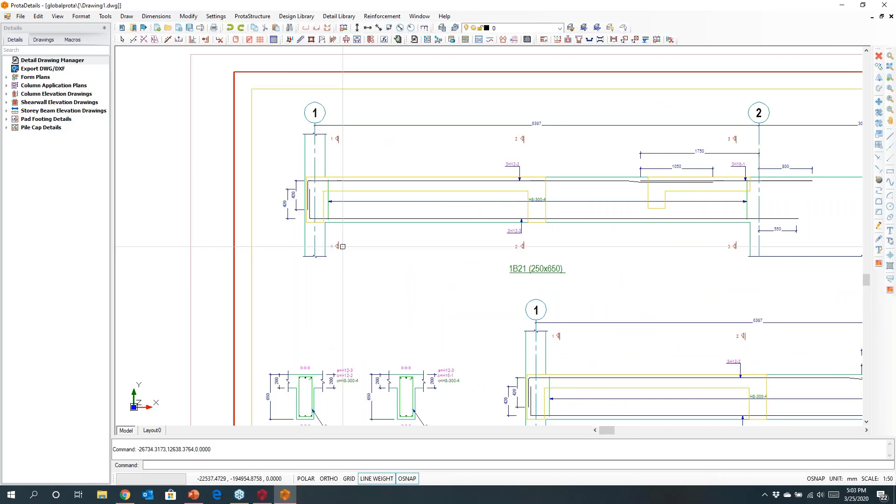Now, if I come down to the beams here, you can just notice the elevations here. All the laps and lengths and so on are all being detailed out there. If you just notice in the detail, there's 3 H20s, it's position mark 8. So if I come across to the table here, you'll notice for 8s, there's 20s, there's 3 of them, 10.4 meters long, 31.2 meters in total. And here you can see the bar bending schedule. So we're actually creating all the detailed information there from that model. So everything is being quantified right down to lengths, laps, everything.

So for this particular plan, there's 1,444.8 kilograms of steel. You can use this to compare different schemes. You can come up with the most optimal arrangement to suit the client. Now these are objects. So if I click on this, you'll notice that this is the different diameters here. You can choose to adapt these as well. So if I didn't want a 20, maybe I wanted to change this to a 25, you can.

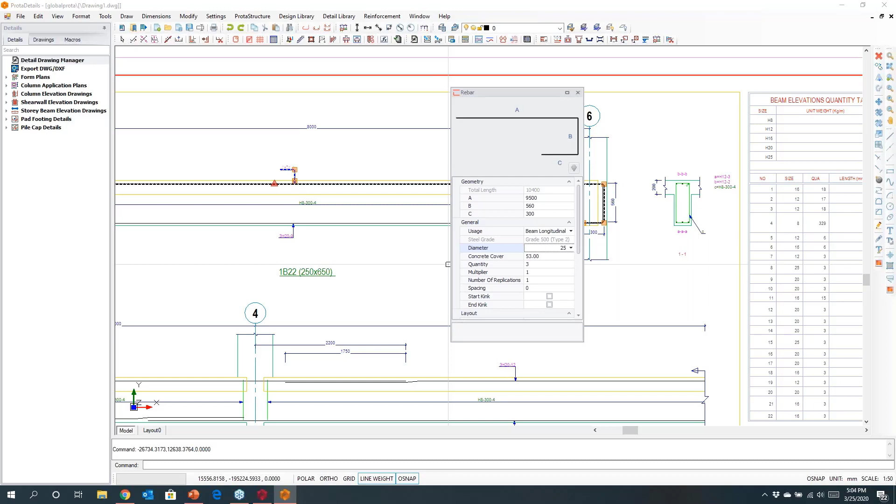Now this is a physical object. We actually understand much of the properties behind this, so the spacing, the cover, how many there are, even things like lap distances and so on are understood. So you can see here that I've just made that change, and this is updated to 3 H25s. If I come back to the sheet here, you'll see that it's updated the size there, and it's recalculated the tonnage. So we actually got 40 odd kilograms more because of that change. Now, if you don't want to draw all the details out, you can show things in schedules.

So here you can see a typical rebar schedule. That might be your first port of call. Maybe you're doing an initial tender and you just want to provide some preliminary information. You might mix and match on a job. You may detail out some elements and just provide a schedule for the others. So the choice is yours, and here that information is available.

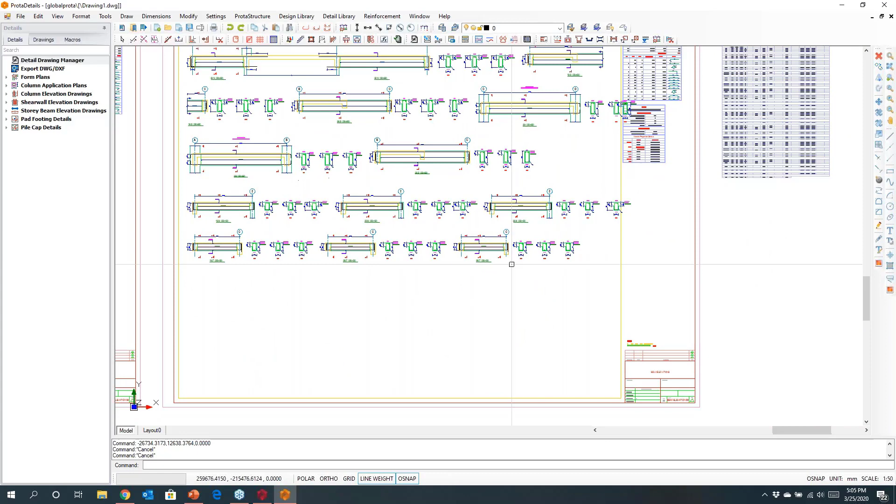Now in here you can also play with the details. As I mentioned, you are in CAD, so if I want to pick up elements, move them around, reposition them, it's entirely up to me. I can work with this just to create what it is that I like. If I want to do things like cut and chop and place, then all of this can be done as well, and I can just reposition things within the model to suit. Okay, so there's some really nice tools in here that can help you with performing your detailing.

We also obviously have created all the pad foundations as well as the pile caps. They've all been created and they're all quantified here as well. Now, I can go and create additional drawings. Anything that I drew up in there before is actually available in here. So if I wanted to draw maybe a particular column elevation up the building, I want to draw the entire elevation, I can. If I wanted to just grab out a particular beam detail, anything that we've created in the model can be drawn out by itself as well. So you can just take advantage of that.

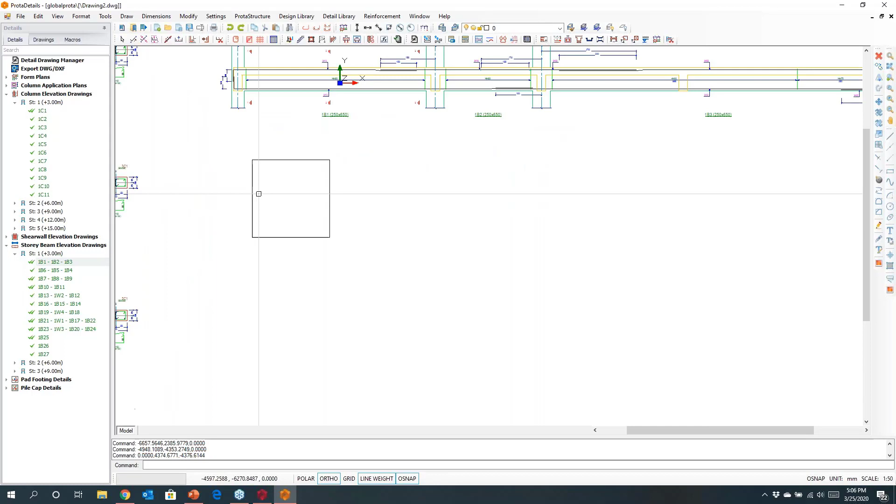As I mentioned, it is a CAD system, so you can do drawing in here. If you want to enhance your details by providing objects within here, you can. So this is entirely up to you, and you may want to place some rebar into that. Maybe it's additional pad footing detail, for example. You could come and work with these intelligent rebars in the model, and that could be created.

Now, if this was a variation, I can select these elements and these can be instantly quantified. So because we're working with objects within the drafting environment, I know that there's 428.3 kilograms of steel there. If I was advising the client on perhaps a variation, this information is available. Instantly we can grab it, and it's all easy because it's all within an intelligent object drafting environment.

Now, I'm going to be about another 15 minutes. I just want to show you a couple more things in here, and then I'm going to move in and talk about Prota Steel very briefly. And I'm also going to update our users on some of the key functionality that we've introduced in recent service packs.

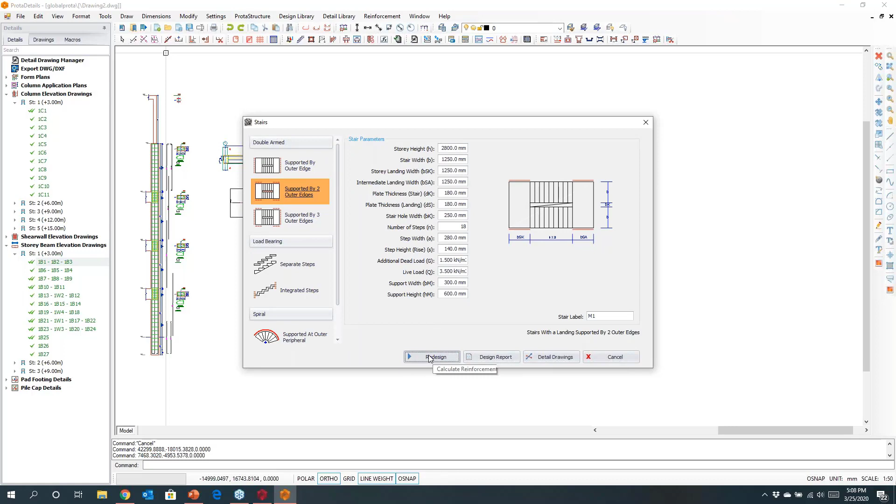So within here, there's also libraries of different component design that you can use. We have things like stair design, things like retaining wall design. All of these you can come in and choose. You can key in basic parameters here. We will design these and we will produce all the checks for these designs, and then you can create your drawings. So in here, you can just use this to come and create and design various components within the model. So it could be some staircases, for example. Maybe you want to design a retaining wall.

You can key the parameters in here. I might want to introduce a shear key. Perhaps I've got things like sloping backfill. These can just be provided within the model. We will automatically look at things like slip circle analysis. We will design this. It will do all the underlying checks. We can produce all the detailed documentation, and I will show you the report.

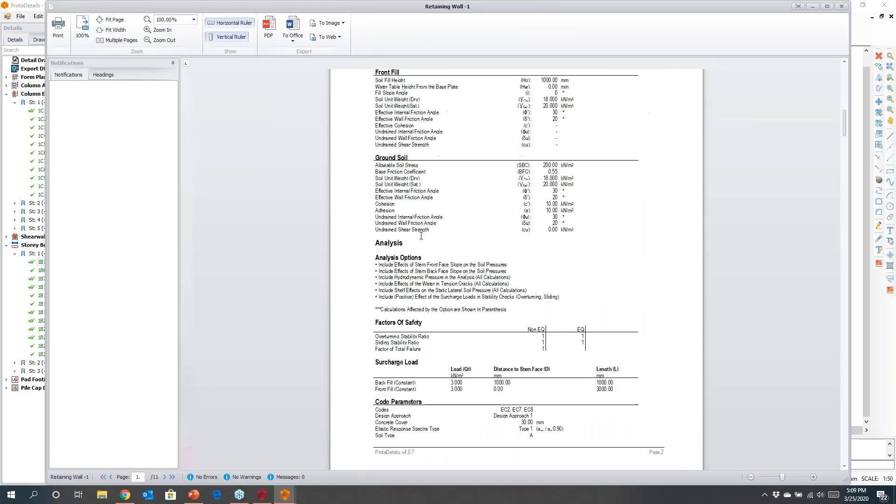This just gives you a sense of the type of output that we provide as part of the calculations that come with the system. So all the documentation is provided, and you can see detailed reports. So here's a retaining wall report. You can customize this with your own logo, and it's providing you with all the step-by-step calculations so that you can be confident in the design.

Now, once you've done this, again, we can just come in and prepare the drawing here. So I can just come and create a retaining wall detail, and you can see those there. If you wanted to, you can carry on. You could include a sheet here. You can add in your own title block. You can insert this, and then you can just position those details in your sheet to suit.

So again, you've got tools in here just to help you place information within the sheets to suit your drawing output. Okay. Now that just gives you an idea.

There are other calculations within the library. I'd encourage you to check out the pile design if you're wanting to come up with preliminary design based on SPT data for your site. That's a great calculation. If you just want to check a pile cap, maybe you've got eccentric pile cap arrangements that you need to check, then you can take advantage of using the pile cap in here as well. And there's other things like corbels and scaffolding and so on.

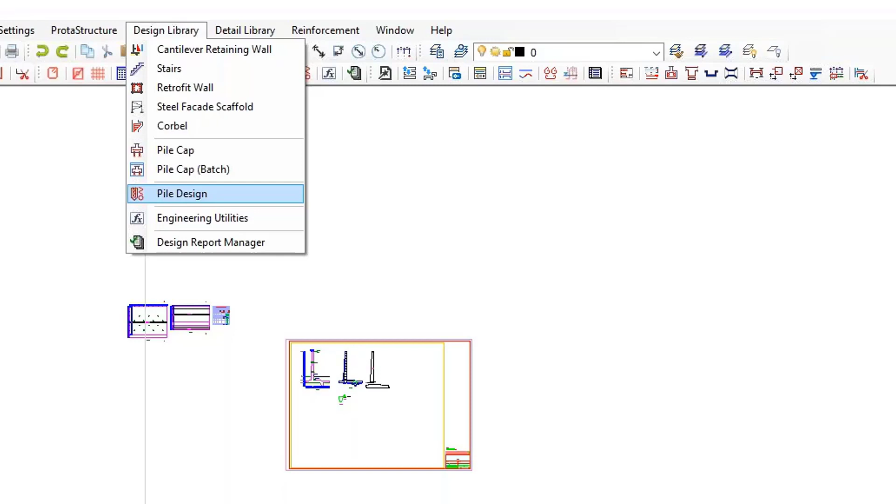Now what we also have is a detail library. So not only do we have the design library, we have a detail library, and these will cover things that you might want to quickly detail out. So if I wanted to create a culvert, for example, with a couple of channels, in here we can just use this, and you can specify different parameters here, and at the end, it will then create the drawing. So if you are wanting to create, say, a culvert detail very quickly, there's tools in here just to help you draft these up, and these can save you significant amounts of time providing that detail.

Okay, so that's Prota Details. It automatically lays things into your sheets as I've shown you. You can work with these details, make changes. It's a drafting system, and you also have the advantage of having a library of various component design and detailing available to you.

Now at this point, I'm just going to pop into ProtaSteel, and I'm just going to work with some of the steel detailing here. I did have another model planned, but I think given time, I'm just going to show you a very simple model, this model here in particular, and I'll work with this just to show you the essence of what we do with ProtaSteel.

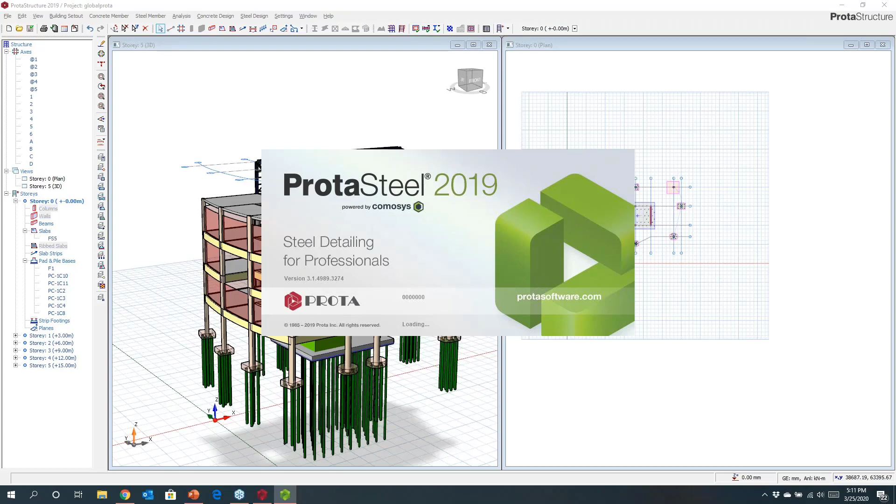So I'm in the ProtaSteel environment. Now what we've done is we've communicated all the load combinations from ProtaStructure into ProtaSteel. So all the underlying analysis results are available in here. And what we do then is make use of this and make use of the physical model to drive the connection design and detailing. And if you notice along the top here, you'll see that there's a whole lot of different macros that we have here for performing different types of connections.

So whether it's a fin plate or an end plate, or maybe you've got welded joints, or perhaps you've got a haunch, or various gusset plate configurations, you can use these macros to help drive the detailing. And it goes right down to even looking at connections to maybe concrete, or even things like embedded anchors, right down to things like checker plate and handrails and so on, can all be created in here.

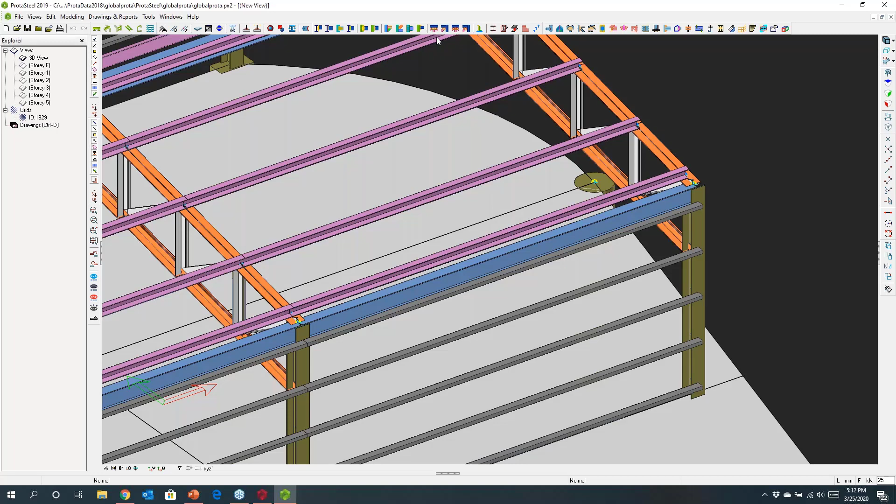So the idea is that you do the basic modeling and design inside of ProtaStructure. You then pass this into ProtaSteel to provide the connections, and then finish off all the detailing. So I'm just going to come in and work with this and create some quick details. So the idea is you just choose a macro, and then you can apply that. So here you can see I've applied a simple connection to connect the purlin to the column. Okay, and I can just work across different elements here.

Here, I might want to come in and connect my beam to my column. So I may want to choose, in this example, an end plate connection. And we can come and just choose this, and you can see that this has been created there. Now, underneath this, as I mentioned to you, we're actually transferring all the analytical results. So I can come in here and look at a connection report for that particular connection. So let's have a look at that to Eurocode.

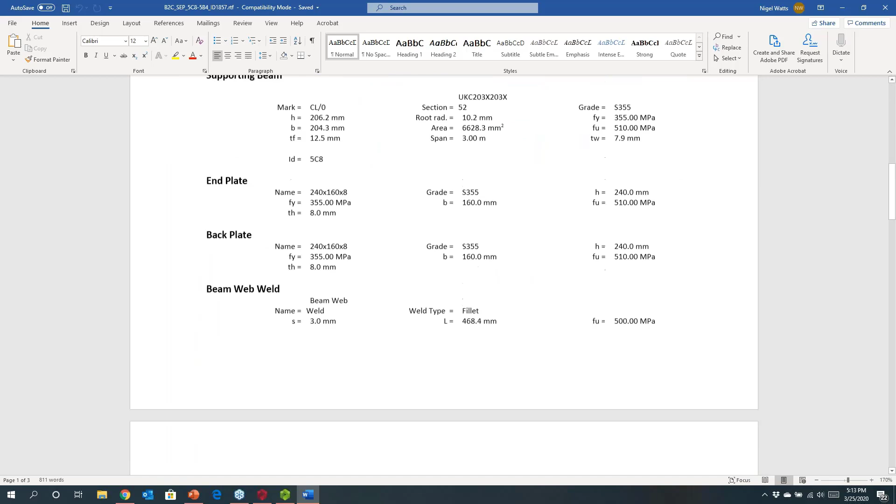You can choose American codes, British standards are in. There's other standards that you can design that to, depending on the head code that you've chosen. And here you can see that we've documented all this out. So you can see detailed information, step-by-step checking that we're performing to satisfy the codes of practice. So end plate checks, back plate checks, various checks in here that are used to satisfy the code, and all the detailed code clause referencing is provided there for you.

Okay, now if I had to go and do this for the whole project, you can imagine that that could take a significant amount of time if I had to click each time to create those elements. So what we've introduced into ProtaSteel is a system called IntelliConnect, and this has been enhanced significantly over recent service packs. And the idea is in here you can come and choose the type of connection that you want to create, and we will batch design them.

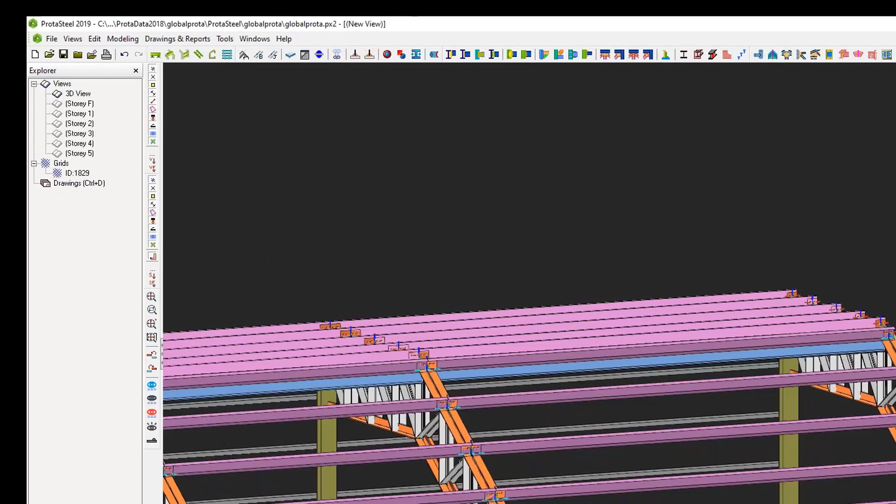So I'm going to maybe create my purlin connections. I can choose a preference here. Maybe it's a reversed angle cleat. I can play with things like maybe I'd like an extension to connect my cladding to. And if I just run that, you can see it's just now moving through and batch designing those connections all in one shot. So they're done. And if I come into the model here, you can see that we've created those connections there.

Okay, I might want to carry on. Let's do some other connections. And maybe I'd like to create my girt connection. So again, I can come and choose a preference here. I can run that, and it's now going to go through and make those connections for the girts. Okay, so you can see the model there's updated, and you can see that my girt connections have been applied.

Okay, if I just look at this here, this front frame, I'm going to come in and I want to design the truss. I'm going to ask it to design the internals on that truss. And if I just run it, we will automatically size up the gusset plates, but you can see it's just working across the truss there, and it's looking to design those connections as well as we go. Okay, so connection by connection, it's creating, it's looking at constructability as it does this, and it's trying to create and optimize a connection design there for you. Okay, so you can see there that we've made those connections here, across the frame.

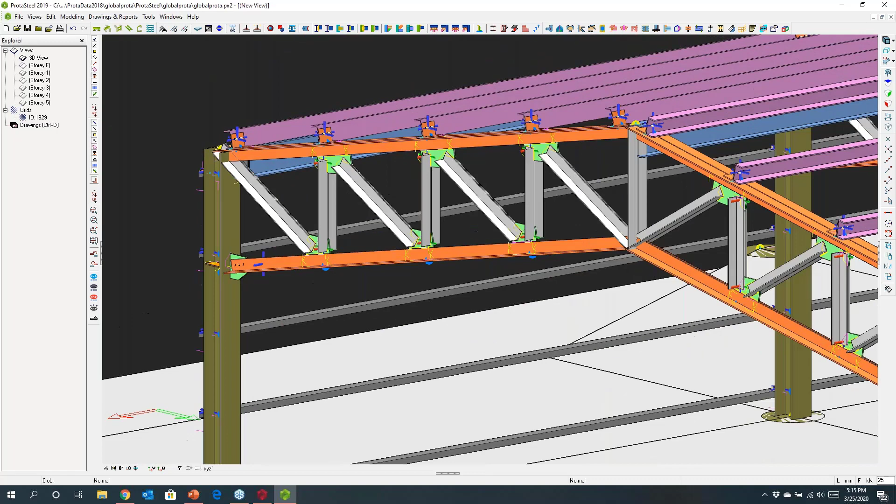Now I'm maybe in this situation here where we've got quite a difficult scenario to connect the top chord of the truss to the column. There's other elements in here that you can take advantage of. I'm going to use another connection macro that we've created to just deal with that very scenario. And you can see there that it's come and created this. Now, this is a macro, so you might just see that my bolt's poking out the top there. I'm actually able to work with this. These are intelligent macros, and you can make changes in here to adapt the connection to suit.

So I might want to drop that a little bit. Maybe I also want to just adapt this to suit. And you can see I've just moved that down, and I've adapted the connection to provide what I'd like to see in terms of connection there. Okay, so these are intelligent macros that you can work with just to create what it is that you want to see. So you can fine tune things as you go.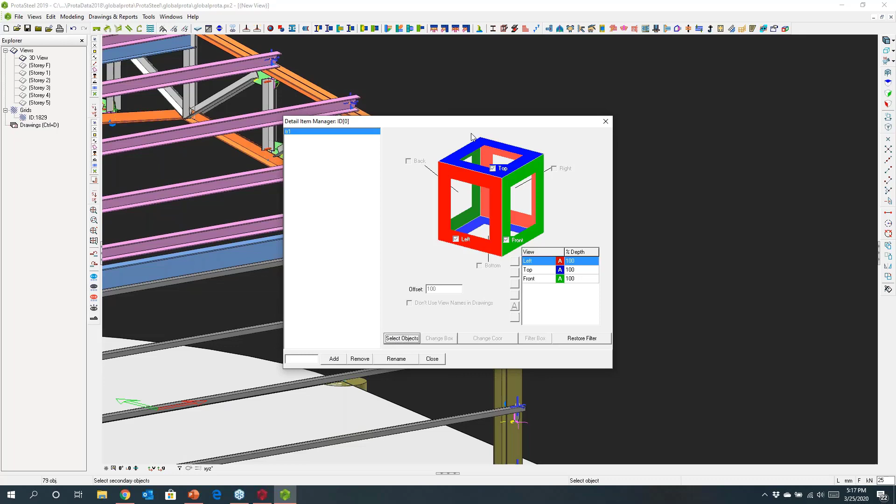Now, last thing I'm going to do in here is just create a quick connection. So I'm going to create a truss connection. Let's just call this truss 1. We can add this, and I can select objects to form part of what I want to create with the documentation. So I can just choose the elements that I'd like to see within my detail. And what you'd see there, when I've created this, I've created a box around this, and think of this a little bit like a camera, and I can choose different views that I'd like to see of that joint. So I can just come and choose those views in here from the model, and then we can use those views to help us generate our connection details.

The final thing I'm going to show you is that we can cut some views through this model. I'm going to choose a couple of points to do this. Okay, let's just come down here. We can cut a section across. Here you can see the elevation, and you can see the actual connection detail and what it might start to look like here. And I'm going to go to my drawings, and in the drawing manager, I'm just going to create a sheet to place these into. So let's just call this, say, truss, and hit OK.

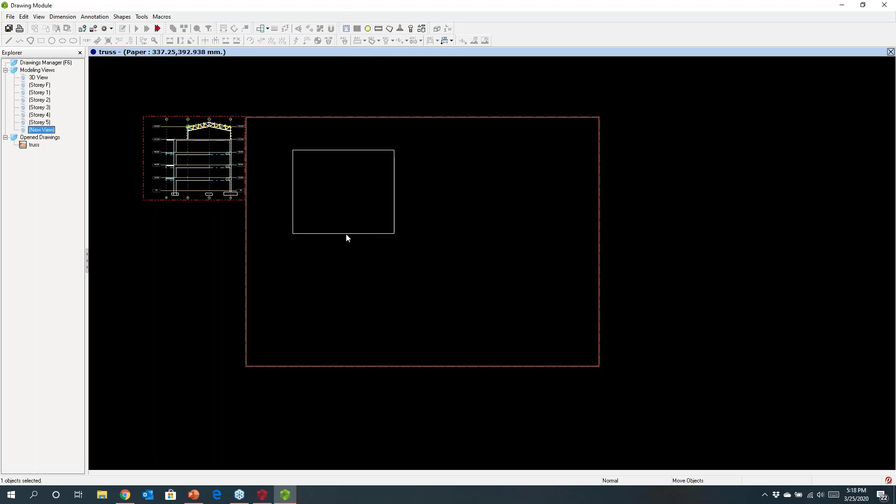I've got my title block available to me, and this view is being populated into the tree here. And I can just grab this and we can just place this within our sheet. So here you can see the connection, truss elevation there. At this point, I might want to just start to do some of my own annotation. So we can come in here and start to dimension things out here.

Okay, so it's entirely up to you how you want to work with this, but you can start to dimension things. But what you'll also notice is that this connection, that box that we created here, is highlighted to you. And if I just hit the box at the top there, it will then allow me to move in and create the connections. Now I'm just going to turn my weld annotations off.

Okay, but here you can see that we've actually moved in here, and you can see that these connections are now being shown. And the truss is actually annotated, so you can see that TR1 relates directly to this connection detail here. Now, once we're in here, we can work with this. So I can come and choose this connection detail, and we can annotate things. So if I wanted to maybe put the member properties in here, I may also want to assign the bolts. All this can be easily done.

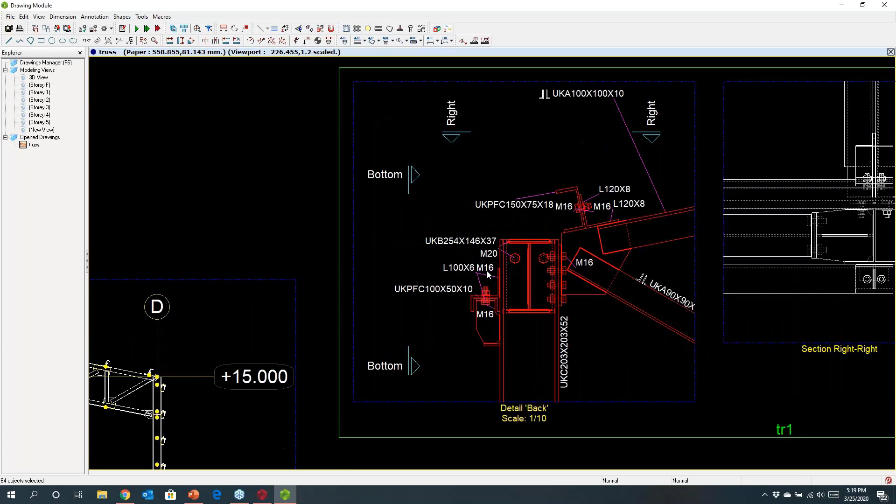Now, these are dynamic labels, so you can move things around if you want to just adjust things accordingly. And you can also start to do things like dimension things out. So you can just come and dimension elements in here to suit what you want to show. So the idea here is that you can just come in and create your different views, sections, elevations of the model, and then you can automatically produce all your steelwork detailing from this. Okay, it's all very seamless.

Now, if there are changes, this model will adapt, it will automatically update, and these views will all automatically update as well. So if you are making changes in design from ProtaStructure, those changes can be seamlessly populated back into ProtaSteel, and then the associated connection details or drawings that you've created can be updated. So that gives you an idea of ProtaSteel.

I have not gone into other things that we can do in here. We can create things like shop drawings. We can create full material lists. It is a very powerful system. In fact, I'd say it's one of the most powerful systems available which is fully integrated for doing steelwork connection design and detailing in the industry globally. So if you are doing a lot of steelwork, then you may find this tool a fantastic addition to your design and detailing library.

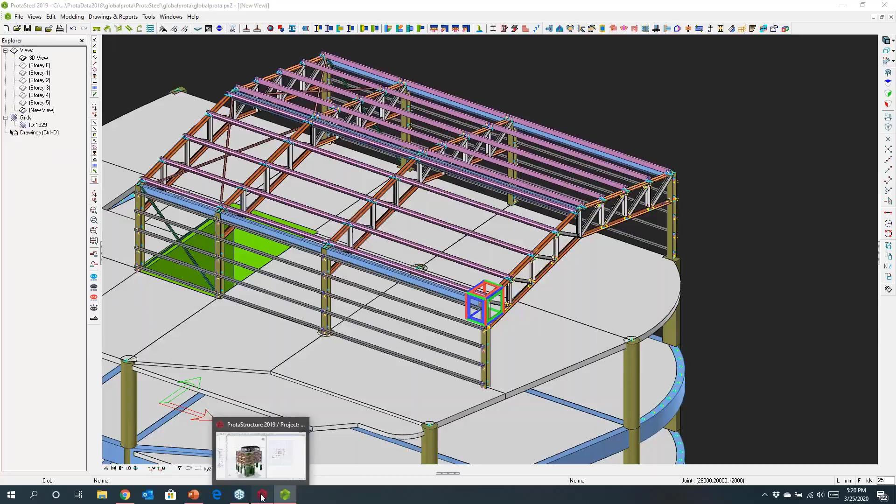So I hope you've enjoyed that simple model. What I'm going to do now is finish presenting, and I'm just going to go back and cover some of what we've gone through today. And I'm also going to touch on some of the new things that we've introduced with this particular Service Pack 7 update. So what's new since Service Pack 4? Service Pack 4 was probably the major release that we've been in touch with in terms of webinars, but there's been a huge amount delivered over the last 3 months.

One of the key things that we've introduced, particularly for seismic design, is performance-based assessment and design. And we've enhanced the different methodologies by also providing a non-linear analysis and design for pushover and time history with our integration with OpenSees. Now this uses a fiber model with distributed plasticity, and we're developing that model inside ProtaStructure. We feed OpenSees, it will then run the analysis, and we will do all the post-processing and all the associated checks.

So for nonlinear static pushover, we will provide you with performance plots. These can be user monitored. You can choose different nodes within this. Any stage can be reviewed, and you'll get a performance assessment report where you can look at various aspects. Maybe you're looking at immediate occupancy or life safety. There's different reports that can be produced to help you with this.

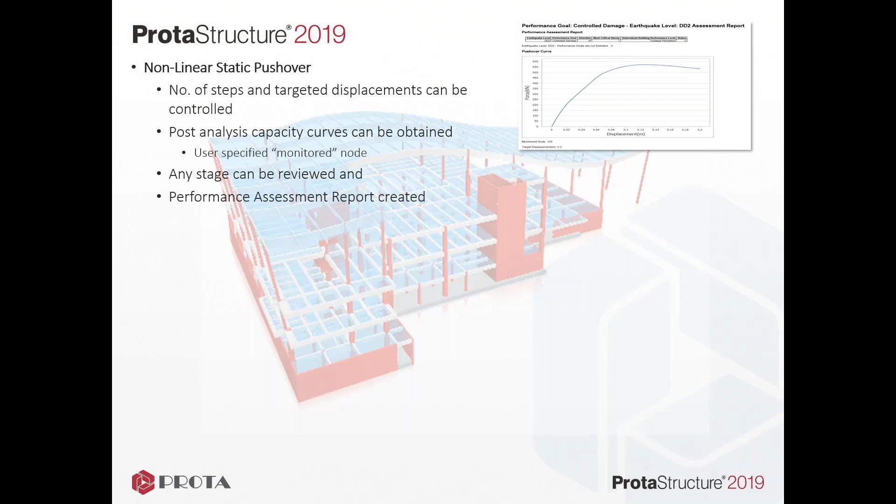We also perform nonlinear time history. You can choose different ground motions. They can be run in different directions. We will automatically rotate those 90 degrees to satisfy code requirements, and we will automatically do the scaling. If you're familiar with this, you'll know that the scaling of the various ground motions is very tedious. ProtaStructure has some very powerful tools to help you automatically scale those so that you can match the design spectral curve you want to run. And again, we will produce reports that look at the performance of the building under those scenarios.

We've introduced new 64-bit architecture for analysis, and as I mentioned, this has had significant speed gains, and there's also a new analysis post-processor. I'm sure the users will really like this. Everything is almost instantaneous. It's very fast and fluid.

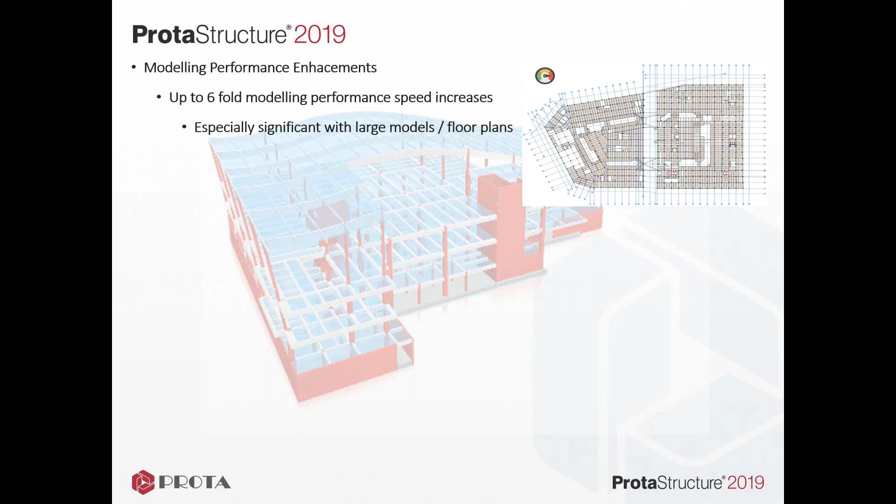We've also improved performance enhancements for the modeling. So if you're working with large models, you'll see that this is significantly faster, very quick to work with large models, large floor plans. It's very, very easy to get around models now and adapt things to suit projects. Just a little saver, some users will appreciate this.

If you're working with wide transfer beams, we now automatically set up rigid arms to collect maybe different columns that may be sitting on different positions along that beam. All the torsional forces will be considered and designed for within the transfer element. So you don't need to worry about collecting those. You do need to make sure that you mark the column as a transfer in the column properties dialog.

We've enhanced buckling length calculations significantly for steelwork, and purlins can now automatically provide restraint. It's very smart, effective length calculations, buckling length calculations for all steelwork. And this really drives economical design for the steel.

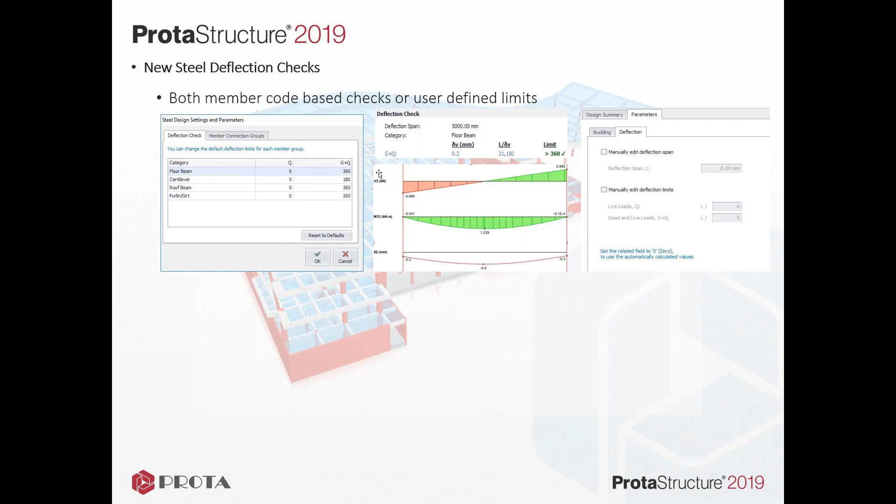There's new deflection checks that we've enhanced to cater directly to code element requirements. And these are also adaptable, so you can set your own preferences to suit different deflection criteria that you may have on a particular job.

We've enhanced the range of different trusses you can have in the models. There's very comprehensive truss modeling. This has continued to be enhanced. And we've also enhanced the way purlins can be modeled. So purlins can sit on top of trusses. They can also sit on bottom chords. It's very flexible now. You can create virtually any type of purlin configuration you wish.

Prota Details has also been enhanced. We've got new retaining wall design and stability checks that have been introduced for that. This is of particular interest to those who are doing seismic design. You'll find those are welcome. We've enhanced our precision detailing. So for things like columns that are maybe sloping, sections that may be tapering in, openings and the like, all the detailing has been significantly improved with this release.

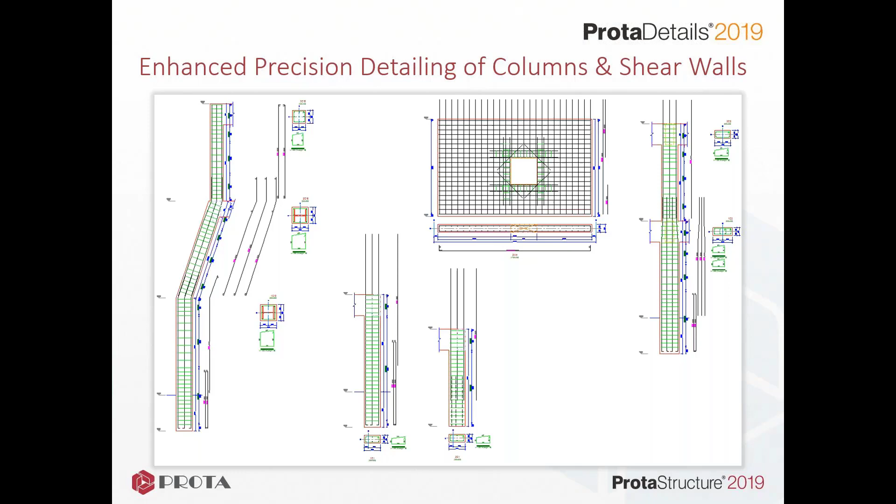Do have a look at the component design library. There's a real broad range of calculations in here that you can take advantage of, as well as the component detailing library. So things like continuous beam detailing, foundations, pad footings, lift pits, culverts and the like can be done.

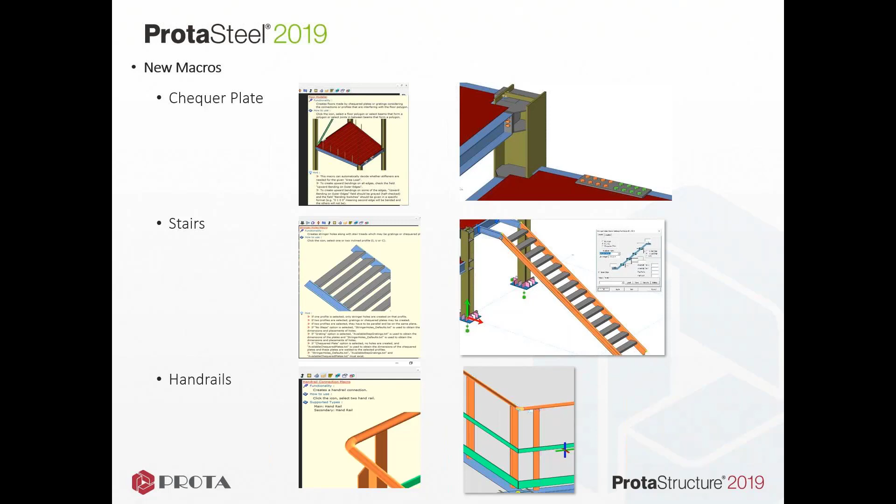Now, Prota Steel, we've continued to work with. So in this service pack, there's new chequer plate options. There's options for stairs and creating stair treads and so on. We've also provided handrails. So really, you can virtually complete any type of industrial structure using these options as well. So you can provide all the detailed output in terms of drawings, taking advantage of those.

We've also been introducing or enhancing and providing additional design reports for almost all the connections now. So flange plate moment connection, beam column welded joints, simple base plate with stiffeners, moment haunch connections are all designed and fully documented with underlying design reports. And these join the many other connections that we have available within Prota Steel that are all being designed.

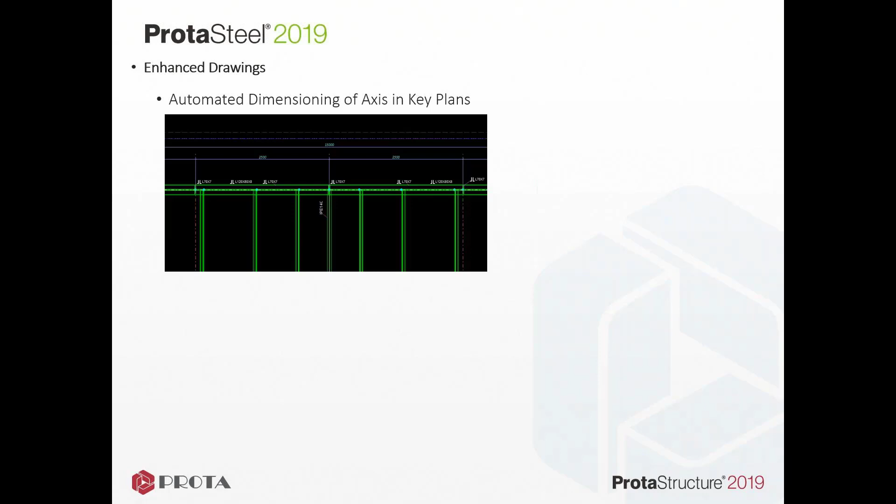We're now automatically dimensioning key plans, so you'll see that they're all annotated with dimension lines. You can enhance these, you can provide additional dimensioning if you wish, and we're also providing all the leaders, as well as enhancing the annotation of standard connection details automatically for you. So if you're using the latest build, you'll see that those have been implemented. So for standard details and referencing, all this is automated within the software.

Now, just remember too to take advantage of IntelliConnect. It is automatically connecting everything for you. We do interrogate all these joints and try and come up with things that are constructible and workable. You can work with these. You can also create your own macros in here as well. So it's very sophisticated, but just jump in, have a go with it, and I think you'll find that it really can help you in a lot of situations with your steelwork.

Now you can create intelligent presets and design overrides. So if you have preferences for certain sections with certain types of connections or certain pinned or fixed joint preferences, all these can be set. You can also have your own company standards, so you might have overrides for certain connections. Maybe you don't want two bolts in a joint, maybe the company standard is a minimum of 3. These types of things can be set up within the model.

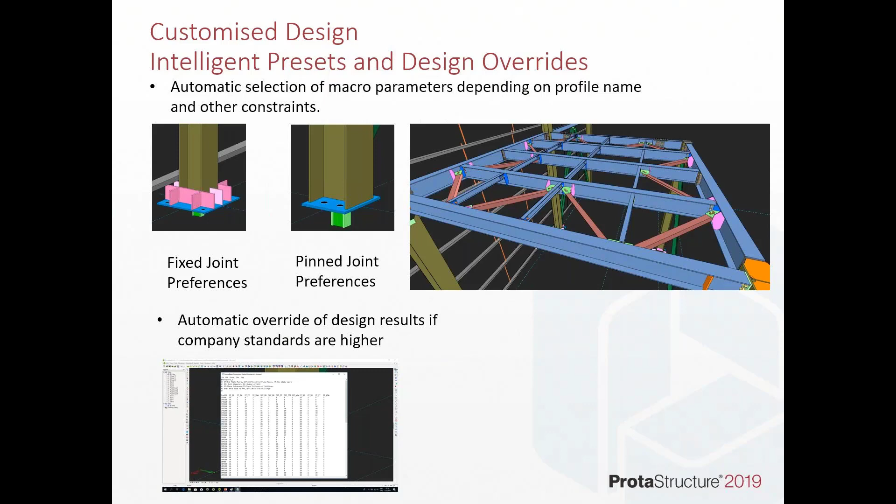And obviously, all the underlying documentation is provided, all the detailed design reports. In this model, you can also see these are color-coded as well, so you can see at a glance if the connection's passed and satisfied all the code checks. And obviously, it provides both the detailed drawings as well as getting into shop detailing and providing all the fabrication drawings as well.

Now, because it's a physical model, we can also communicate not just the ProtaStructure model, but also the ProtaSteel model with other platforms. So we can link it into Revit, Tekla, Allplan, etc. All these links are available through ProtaSteel as well as in ProtaStructure.

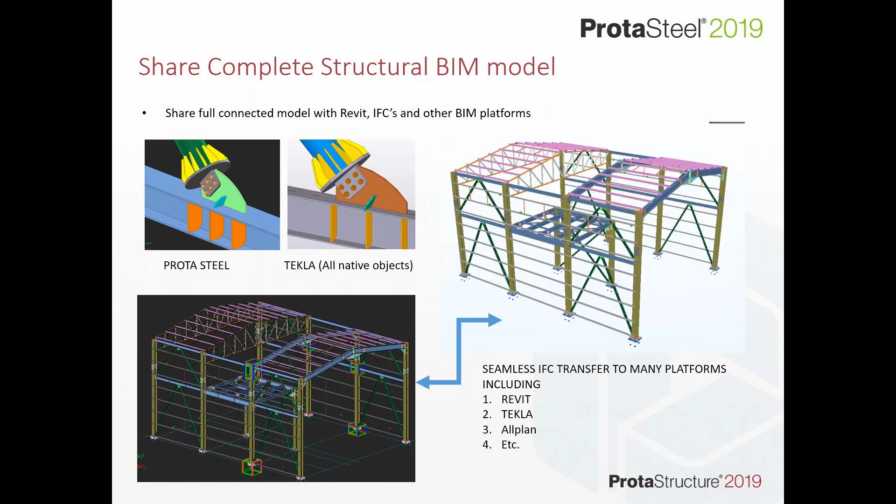We've also enhanced integration with Revit 2020, and that provides additional enhancements with the integration and round tripping, as well as some fixes. There's new IFC links available, and look, this is ongoing. We've got some really fantastic stuff coming that you can take advantage of as this unfolds.

Now, what we're trying to do at Prota is we're really trying to provide you with exceptional value. And this is why every system that we create comes complete. So it's not just about building design, it's also about drawing management, drafting, component design, quantities takeoff, all the different things that may be required of a project we're wanting to deliver integrated into one system. And that goes right down to steel connections, right down to shop detailing, right through to collaborating this with other project parties. So this is what we're providing within one complete, integrated, seamless platform.